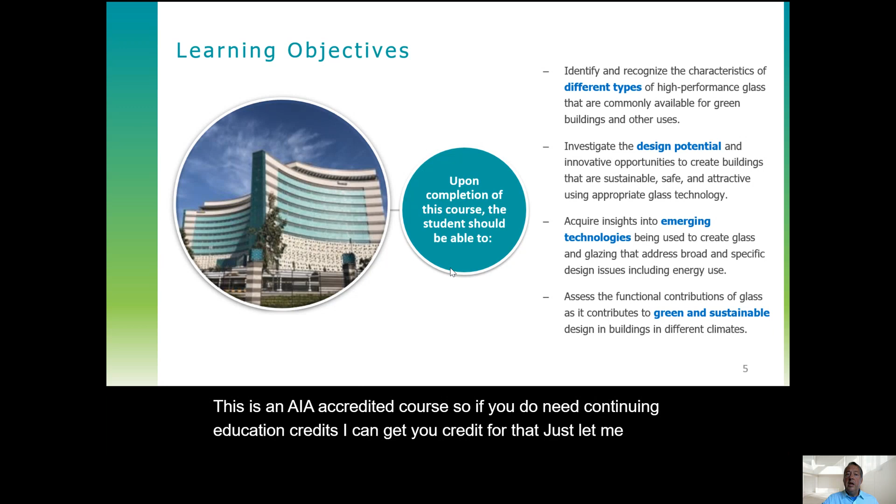What I'm going to talk about today is different types of glass—typically high performance glass products used in commercial and residential buildings. I'll also talk about some specialty applications within that space, a little bit about design potential and how these ideas can impact your design, and emerging technologies. These are sometimes new products, sometimes things that are coming, and sometimes products that are already available but people just don't have much awareness on how to use them. And then lastly, I'll talk about green and sustainable policies.

This is a course that I typically give to architects. A lot of times I do it at different trade shows and conferences, but I also do it in internal meetings, and with students. I do a wide variety, so I try to cover a pretty broad base.

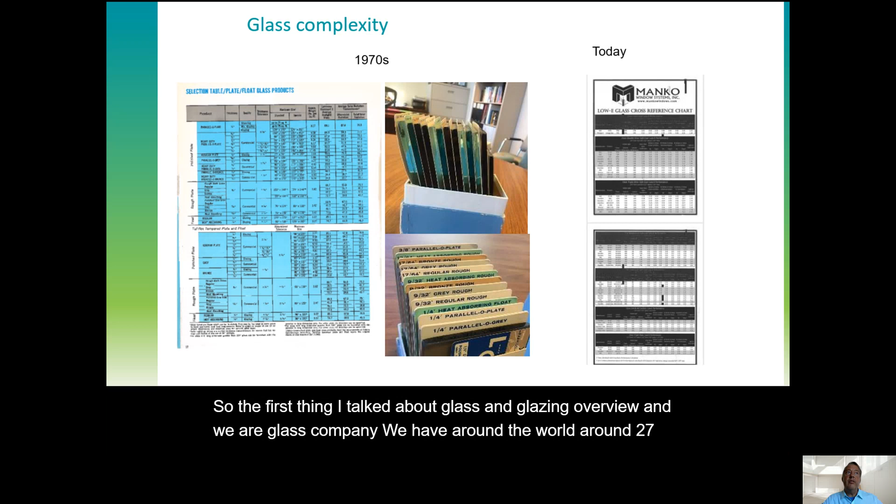The first thing I'll talk about is glass and glazing overview. We are a glass company—around the world we have around 27,000 employees. We make flat glass through the float process in about 30 some countries. We really make large sheets of glass, and we've been in this space for almost 200 years.

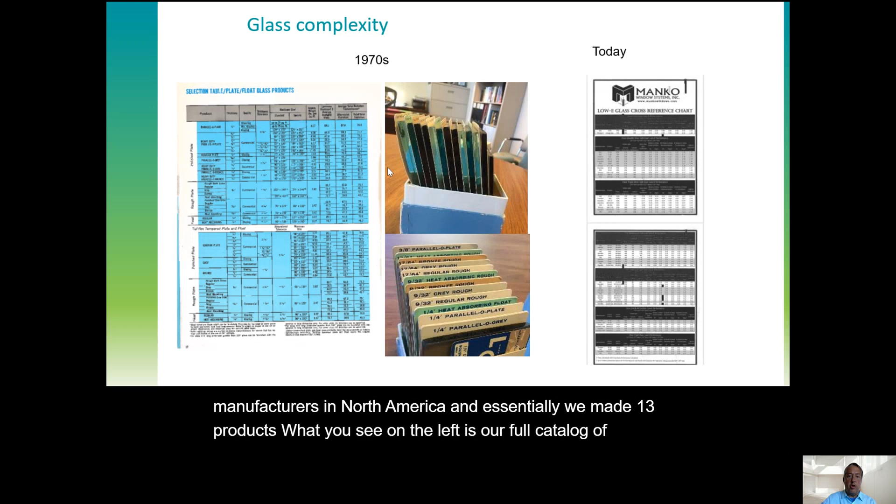Really, the last 50 years, glass and windows have become exceedingly complicated. Back in the 1970s, what you see here on the left is our company in North America, called Libbey-Owens-Ford. At that time we were one of two manufacturers in North America, and essentially we made 13 products. What you see on the left is our full catalog of all the products we made and all the performance. In the middle is our sample kit—this is what we'd send to customers. We had 4 colors, maybe 3 or 4 different thicknesses, about 13 products, and you'd cut that into a rectangle, stick it in a frame, and that was how you made windows for commercial and residential buildings.

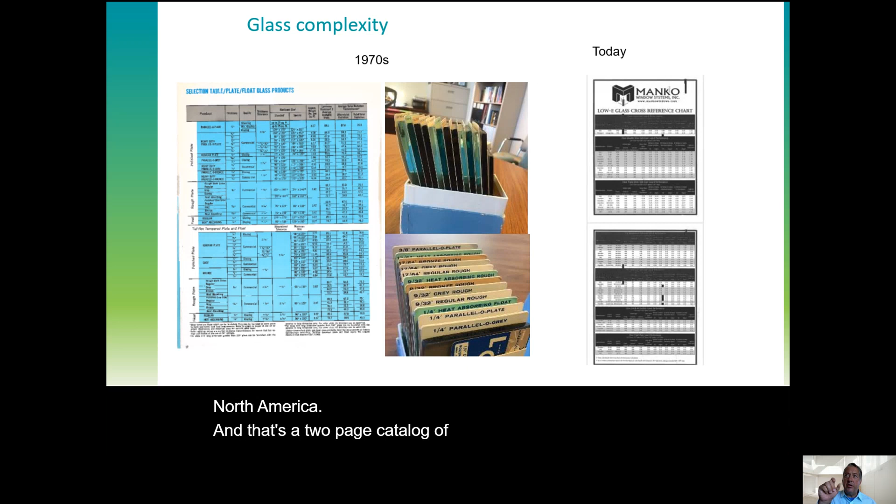Compare that to today—people make what's called IGUs, or insulated glazing units. Typically that's 2 pieces of glass with at least some type of low E coating on the inside surface, and it could be a couple different ones. This is one of our customers in North America, and that's a 2-page catalog of just the alternatives they offer in terms of double glazed units. Now there's maybe 24 different manufacturers of low E coatings and different levels of low E coatings. There's sputtered and hard coat, and some that are fourth surface low E's, and this doesn't even add in the complexity of added function—this is just performance ones. So windows and glass have become very, very complicated.

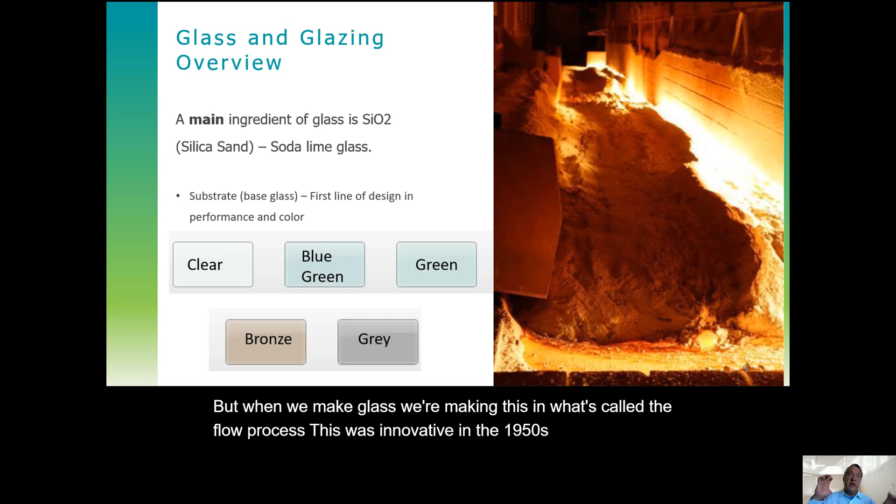When we make glass, we're making it in what's called the float process, innovated in the 1950s. Essentially what we do is in a very, very large furnace—like about a 7,000 square foot ranch house, single story—that is filled 4 feet deep with molten glass. That's the scale we have in our float lines, very, very large industrial manufacturing. We take sand, soda ash, dolomite, dump them in together, and melt that in this major furnace.

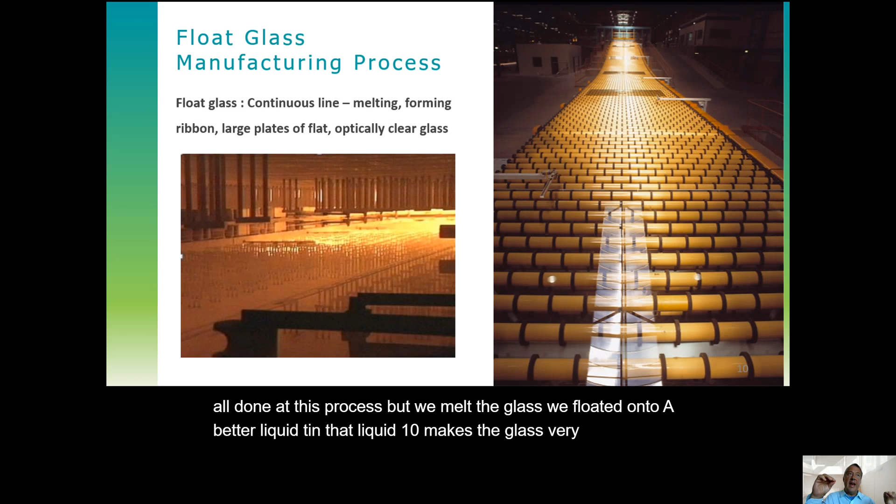If we want to change the color of the glass, we do it at this point with the raw materials—from clear, to low iron, to green, to blue, that sort of thing. It's all done at this process. We melt the glass, float it onto a bed of liquid tin. That liquid tin makes the glass very, very optically clear and very flat. You cool it from about 2,000 degrees down to about 1,000 degrees, put it on a roller bed, cool it down to room temperature, cut it up into big rectangles, and then use that to laminate, temper, that sort of thing. So we do a variety of things there.

When I talk to architects, typically what I'm talking about in terms of performance boils down to about 3 main things. So when we talk to people, we're talking about, when I look at this window, how does it perform?

What's the daylight? How much of the visible light transmission do I get? Between 0 and 1, 1 is 100% of the daylight gets into the room, 0 is blackout blinds.

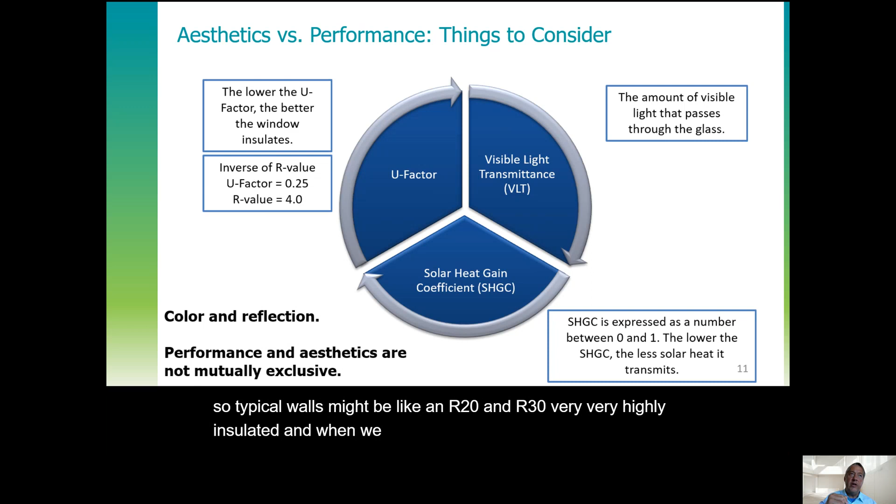U factor is how good of an insulator the window is. Typical walls might be R20 or R30, very highly insulated. U factor is the inverse of R value in North America, so a typical window is a U.25. In the UK, that would be like 1.4 watts per meter squared, something like that.

And SHGC is how much that window or glass reduces the solar load that comes through the window. 1 being 100% of the sun's energy comes into the building, and 0 means it blocks out all the heat that comes in. But those are the things that we typically talk about.

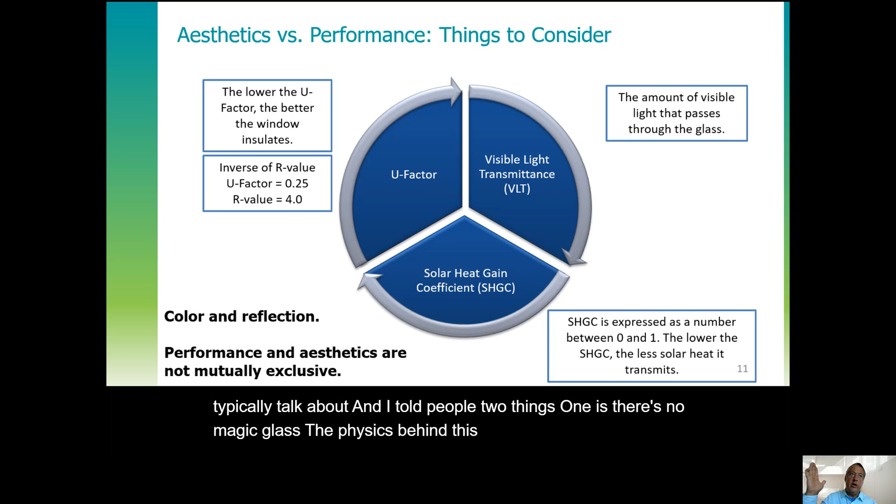I tell people two things. One is there's no magic glass. The physics behind this says you can't have a window that's 100% visible daylight and doesn't let any of the heat in. It just doesn't work that way. So there's no free lunch - there's definitely trade-offs in terms of all these different things.

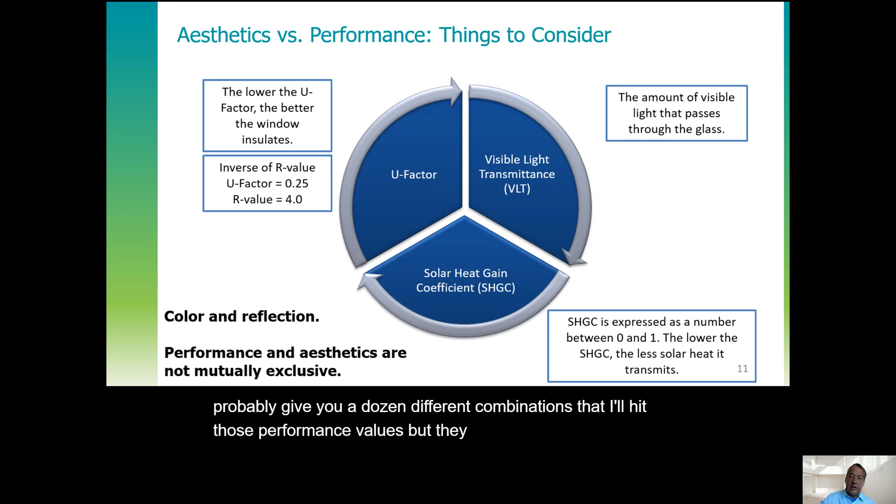But with that said, you can take a snapshot in time - a 0.3 SHGC, a 0.3 U factor, and 70% daylight - and I can probably give you a dozen different combinations that'll hit those performance values, but they will look dramatically different. So it's not just how does it perform, you also need to know what you're trying to accomplish in terms of the aesthetics.

If I do that, about 40% of the energy comes in with visible daylight, so you're going to get about a 0.4 SHGC if you have a very high daylight product. If you want something lower than 0.4 SHGC, you have to take out a little bit of the sunlight - that's just the nature behind it. Some coatings do a better job of this than others, but that's mostly what we're trying to do with coatings and glass.

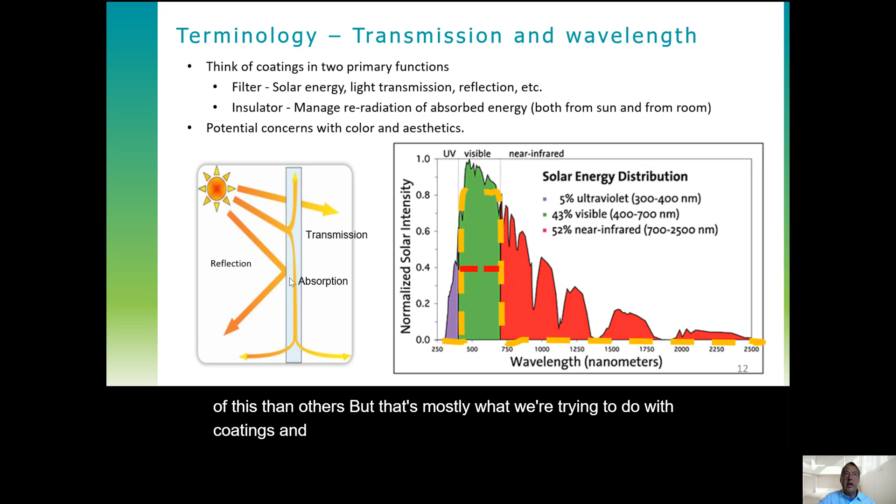The other thing we're trying to do is make the windows into better insulators. That's done several different ways - you have an air pocket or argon pocket, some sort of gas in between, and different coatings that perform better than others. Essentially, the sun's energy and room heat travel in waves, and what we're trying to do is manipulate that energy so heat transfer either gets transmitted through, absorbed into the glass, or reflected off.

We're trying to manipulate that to make the window a better insulator. So we might reduce our transmission a little bit by bumping up our absorption, or bump up our reflection - but you're trying to reduce heat transmission through your window and make it a better insulator.

Window design has loads of complexity that you can do to make windows better performing - you can put shades in front, plant a tree in front of the building, have thermal broken edges. There's all these different things in terms of window design. But in terms of the glass, the center of glass performance, there's really only a couple things we can do to make the windows better performing.

If we use a darker, more absorbing glass, less heat gets transferred through. If we use a better gas in that cavity - going from air to argon or krypton - the larger the molecule, the less there is to do convection and conduction, so it just performs better if you have a better gas or no gas at all. A vacuum is a really good insulator. You can also have a better performing low E coating.

When you talk about this, a lot of times you go from a hard coat to a single sputter silver to a double silver, or you can use more than one coating. You can put a coating on surface 2 and surface 4 in a window unit, or use more than 2 pieces of glass. You can go from a single glaze to a double glaze to a triple to a quad. But in terms of center glass, that's really it - that's all the triggers we have to try to drive better energy performance for windows.

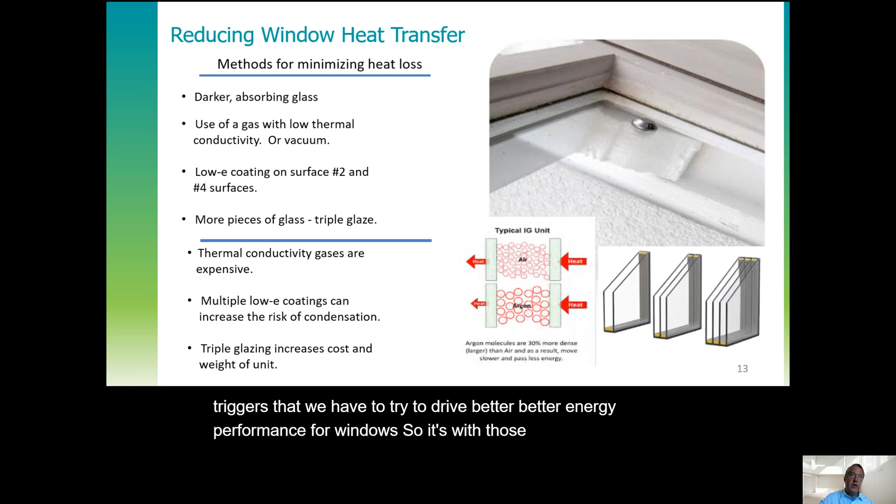So with those constraints, the budgets, and the performance and aesthetic targets, we try to help people accomplish their goals. What we see a lot of times in new architectural design is it's not just simple, 'we want a green looking building that performs like this.' We're trying to add different functionality. There's all sorts of different codes, sometimes opposing codes where the glass wants to do different things. So there are a number of things architects and designers have to consider when looking at building design today, and sometimes that makes the glass and windows really complicated.

One of the things we see is fire rated glass. This is becoming more and more common. The code typically says this window or this wall has to resist a fire for 15 minutes, 20 minutes, 90 minutes - that sort of thing. Typically there are 2 different ways that we do this with glass components.

One is what's called fire rated glass - think of this like your glass cooktop or Pyrex cookware. It's literally a ceramic glass that can withstand temperature for quite a while before it fails. It's a nice product, but it doesn't always last for some of the higher targets required for fire glazing. Sometimes you have requirements that say if that glass gets hit with a fire hose, it has to withstand the fire hose blasting at it for 15 minutes as well. Well, ceramic glass is going to shatter if that happens.

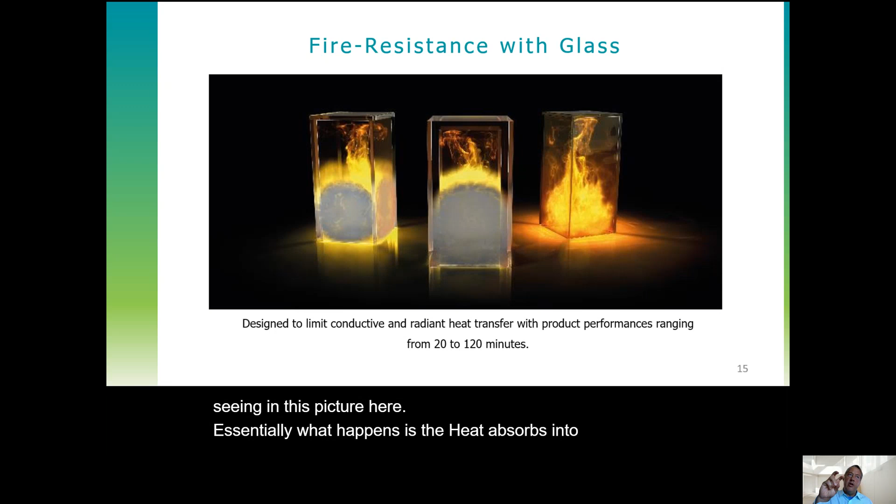So the other way we do this a lot of times is typically 2 pieces of glass with some sort of gel or goo in between them, which is what you're seeing in this picture here. Essentially what happens is the heat absorbs into that gel in the center, and it phase transforms from a liquid to a crystal. That crystal transformation absorbs the energy and withstands it, allowing a longer amount of time before that unit will fail.

So we see a lot of times fire resistant glazing is an important component. Really, I'm not an expert on this subject - we can point you to 3 or 4 people who can do a dozen different hour-long seminars on fire resistant glazing. We're just trying to give a very high level review of the different products customers might expect, or things architects might consider.

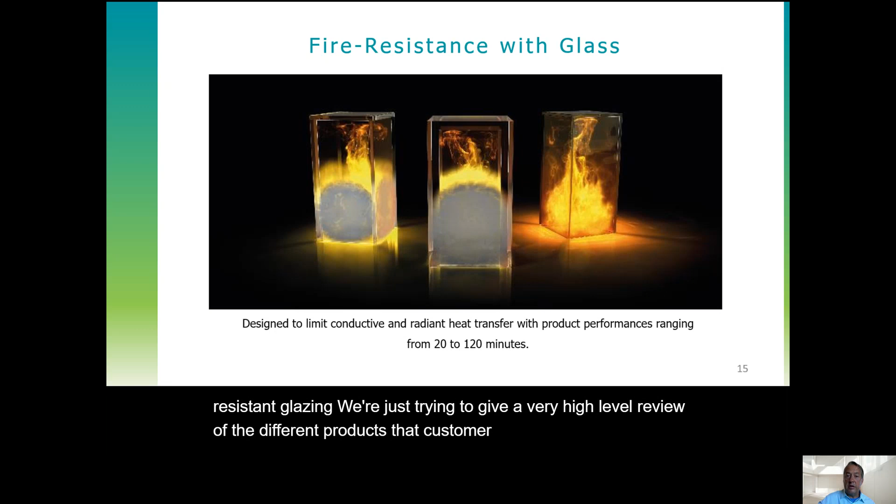The other thing we see a lot of questions on, and this is becoming more important city by city with local ordinances now, at least in the US, is acoustic control. Like in New York City, the 5 boroughs all have different acoustic ordinances they have to have for apartment buildings, and there's all this complexity that goes into it. But acoustic control, simply put, typically has the same sort of solutions.

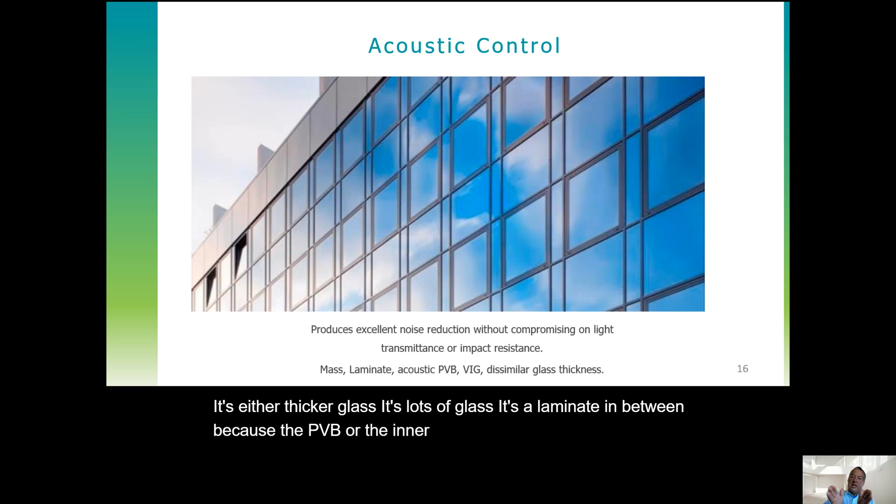Sound travels in waves, and you typically need mass to absorb that wave - that's what most of these acoustic solutions have. So it's either thicker glass, lots of glass, or a laminate in between, because the PVB or interlayer material between the glass - that plastic material - absorbs that acoustic slightly differently than the glass does. So there's acoustic PVB, really, really thick glass.

VIG, or vacuum insulated glazing, is a really nice solution for acoustics because sound doesn't travel through a vacuum as well as heat doesn't travel through a vacuum. So that does a nice job knocking out your acoustics in a really thin form factor. Or if you take dissimilar glass thicknesses, a 6 millimeter over 6 millimeter in an IGU will not perform as well as a 4 millimeter over 8 millimeter in an IGU. That's just because those 2 different thicknesses attenuate the sound slightly differently, so it gives you some benefits.

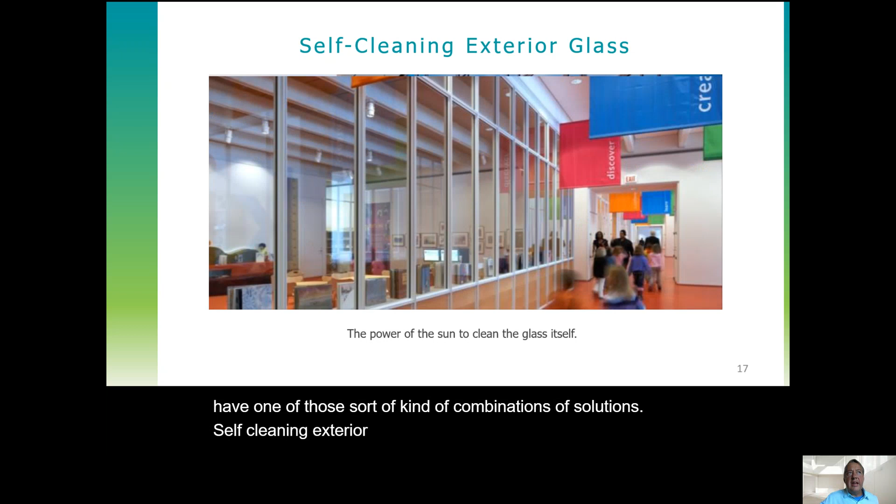But generally, acoustic solutions have one of those sort of combinations - self-cleaning exterior glass. Again, it's not fully self-cleaning, but it 100% minimizes the maintenance required on the outside of the building. This is a really nice solution, and it's been around for about 20 years, but it hasn't really fully taken off.

One of the reasons why is if you put a self-cleaning glass on your number 1 surface, a lot of times that means you have to move your low E, which is typically on surface 2, to surface 3. So that drop off in performance, sometimes you can handle that and sometimes you can't.

But we're now seeing double-sided products that have self-cleaning glass on surface 1 and a low E on surface 2. I think this is going to really start to take off, because what self-cleaning glass does—I'll explain the technology a little bit—is it's typically a UV charged coating that's on the first surface, on the outside of the building.

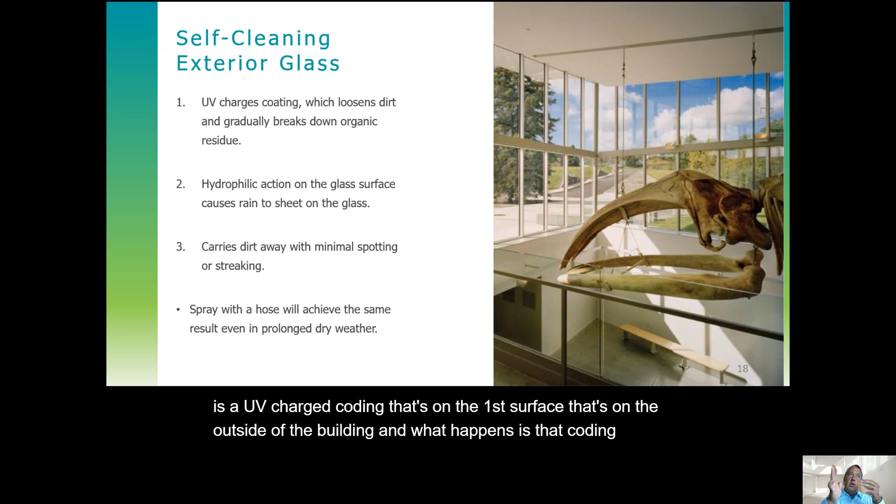What happens is that coating gets charged, and then when any sort of bird fouling or organic material or dirt gets on that surface, the coating actually starts to break down that material. And then when you get rain, or any sort of water—rain, a hose—it actually sheets the water off in a hydrophilic action. It helps take that bird fouling or any organic material off. Once it's broken down, it's eliminated.

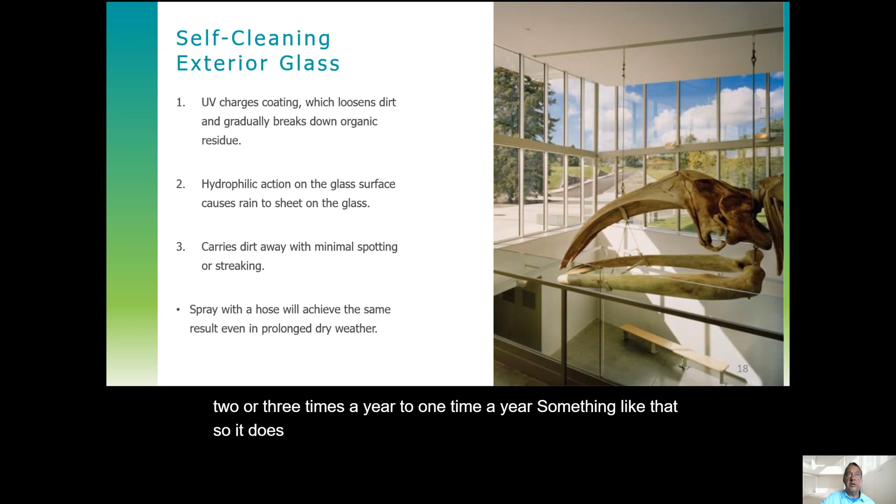So the reasons this is nice and why architects like it is it minimizes the amount of cleaning, and it improves the aesthetics of what that building looks like month over month, year after year. Maybe you reduce your building cleaning time from 2 or 3 times a year to 1 time a year, something like that. So it does have really nice benefits in terms of health of occupants—you don't have to send people up—and it reduces costs for a lot of building owners as well.

Anti-reflective coatings—this is something else that we often see in design. What we see with anti-reflective coatings is a single piece of clear glass has about 8% reflection, so each surface gets 4% reflection off of it. So when you take and put that into an IGU, you've got 4, 4, 4, 4—16% reflectivity off of a regular window in a commercial building.

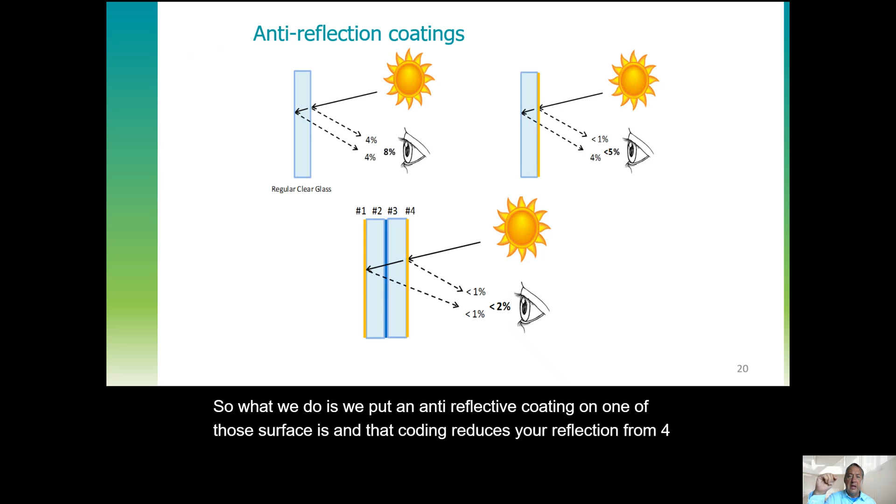So what we do is we put an anti-reflective coating on one of those surfaces, and that coating reduces your reflection from 4% down to about 0.7%. So if you laminate that together, you go from about an 8% reflection down to less than 2%. It dramatically reduces the reflection, and it gets rid of the signal to noise of what you're seeing through the glass versus what you're seeing reflected off the glass.

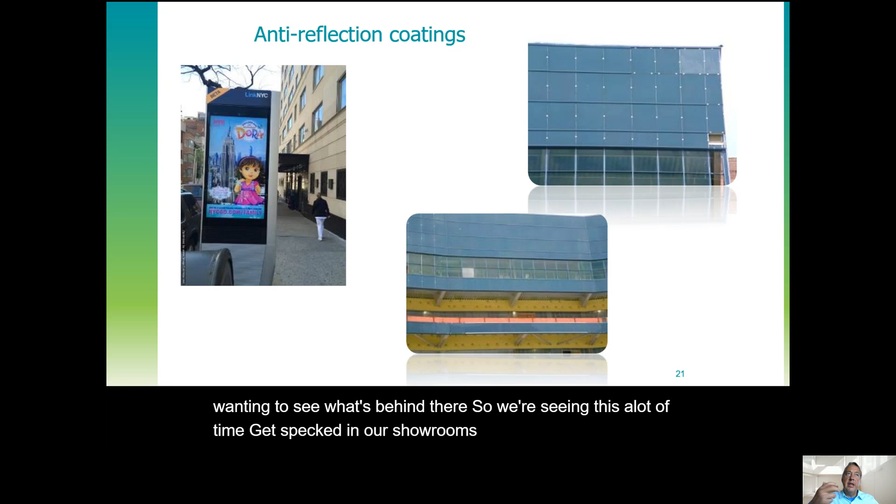These are 2 examples of where this really manifests and shows benefits. One is in signage or display—this could be digital signage or print ads, and it could also just be storefronts where people want to see what's behind there. So we're seeing this a lot of time get spec'd in car showrooms and museums and places like that, where there's signage we really want people to read and see.

The other is in the vision areas. This is a great example of a stadium in North America—this is the vision area, these are all the press boxes. What happened with this one box in the middle that looks like it's this creamy white color—that's actually kind of what normal reflectivity on glass looks like.

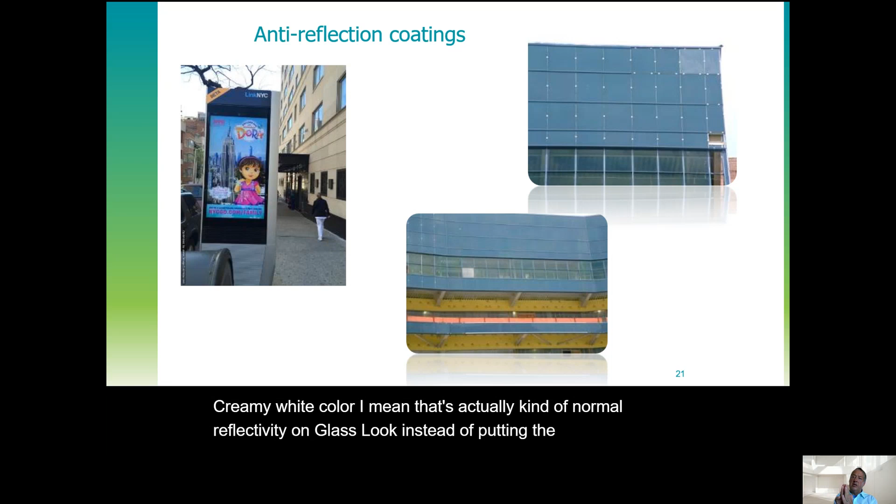Instead of putting the coatings on the outside surfaces, the fabricator just flipped them around and inadvertently put it against the middle. So all these areas around it have anti-reflective on both surfaces. You can see inside the overhead lights, you can see chairs—you can really see through the glass and into the glass. And where this really benefits is the people that are in the press box.

When you're watching a game, you don't see that reflection of your high-vis shirt or the white lights behind you. You can actually see the sporting event. So there's really lots of nice benefits in your vision areas.

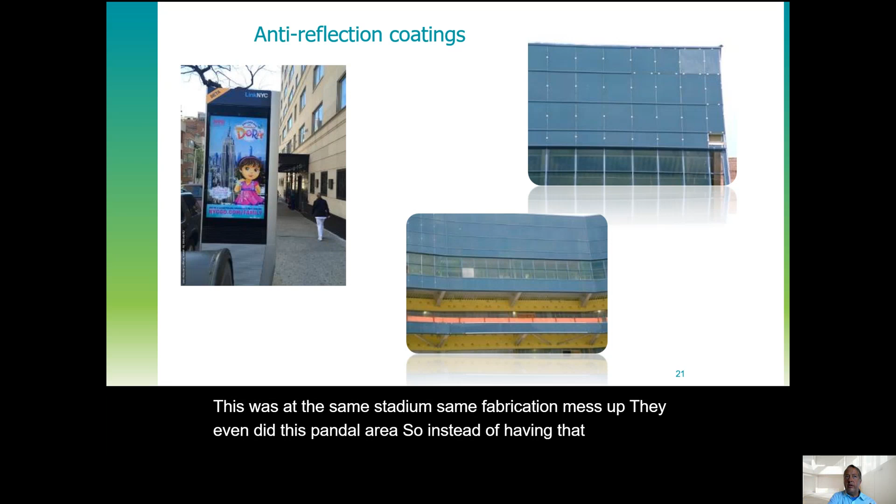This was at the same stadium, same fabrication mess up—they even did it in the spandrel area. So instead of having that reflection of the glass onto the field where it might blind the players, they actually put it and flipped it around so you wouldn't get that glare down. These are ones that, again, they just flipped around and you see the same reflectivity on it. But these are really nice ways that you can actually use anti-reflective coatings in your design to dramatically improve the look and aesthetics.

Bird-friendly glazing—this is another kind of emerging topic. It's been around in discussion for maybe 5 years.

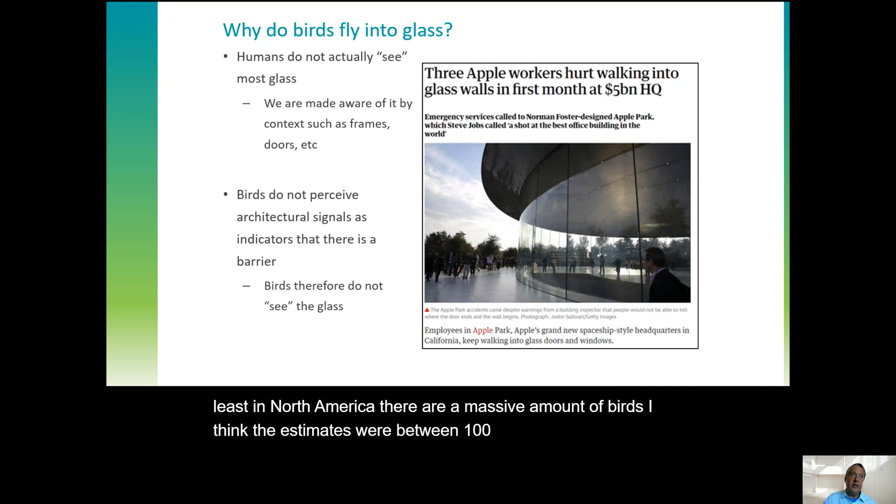It's not ubiquitous yet. It's not everywhere. But what people are seeing, at least in North America, is a massive amount of birds. I think the estimate is between 100 million and 1 billion birds per year die flying into buildings.

And people say, well, birds just don't see the glass, and people do. That's not true. People actually don't see glass either. What people see is context. You and I notice the framing on the door. We notice the butt joint. We notice the seams. We notice the handle. So therefore, we don't walk into the glass.

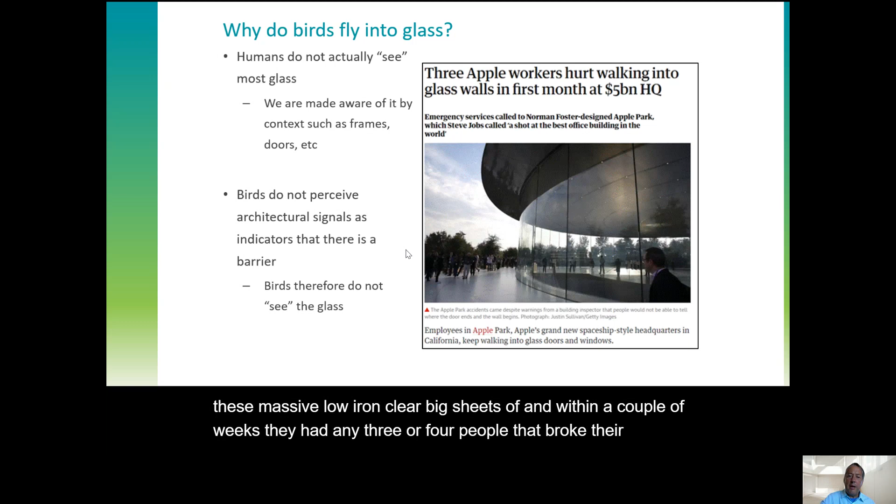But if you go to larger and larger pieces of glass and lower iron, where it's higher light transmission, what's becoming more common is people actually walking into these large sheets of glass. Apple built the spaceship in Cupertino, and they put in these massive low iron, clear, big sheets of glass. And within a couple of weeks, they had, I think, 3 or 4 people that broke their noses walking into the window. So they had to put stickers all along there so people would stop doing it. People don't see glass either.

They see context. And so what we're trying to do with birds is, you can't educate them on context. What you have to do is put that context into the glass. And what's generally accepted is 2 inches by 4 inches. Every 2 inches by 4 inches, you have to put in some sort of contrast that gives them that big difference between transmission and reflection that says, hey, there's something here.

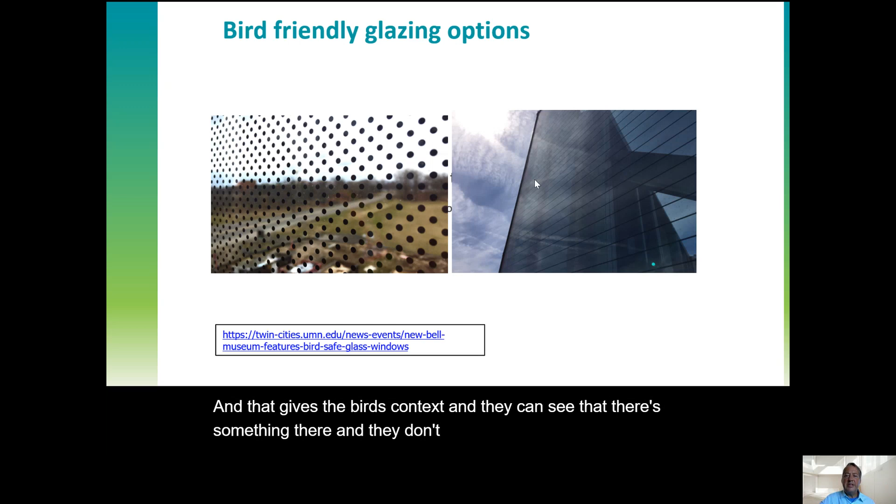And the majority, 99% of what's actually been done, is people just put frit, little ceramic dots, all over the glass. And that gives the birds context, and they can see that there's something there, and they don't fly into the glass. But aesthetically, that doesn't look great. You see all these little dots when you're looking through it. From the outside, maybe it's not obvious, but from the inside, you definitely notice this in your vision area.

So what people are developing is these products based on the bird's eye. The bird's eye has this big spike in the UV where the human eye does not. So ideally, if you could put all that contrast in the UV, you then make something that birds can really see and isn't noticeable to people. So that's what we're trying to develop. There's a number of people that are developing these enhanced coatings as well.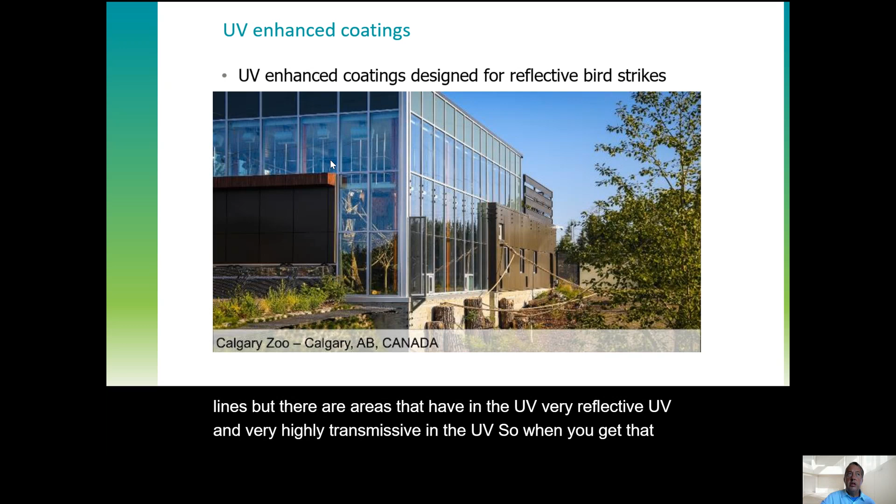In the US, this is still very, very regional. There's no ASTM standard on it. Even the world's experts really don't agree with how we are going to test and do this. What we're trying to do as an industry is say, here's the way you test this. And if you test against these standards, you'll come up with a number that's a threat level, and anything better than this threat level will pass.

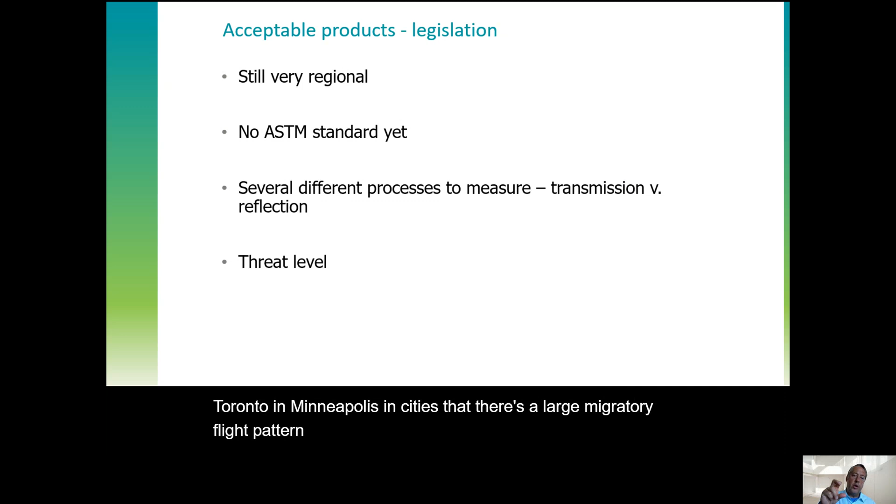That's what's trying to be done, but it's still kind of new and emerging, and it's really regional. So in cities like Toronto, in Minneapolis, in cities where there's a large migratory flight pattern and a bunch of big buildings, there's a load of regulation on these things. Other cities, you might not even hear about this.

So now I'm going to talk a little bit about emerging technologies. What I mean by this is it's not necessarily something that's brand new, but it is something that's starting to emerge as a bigger need and demand in the marketplace. The reasons that we're seeing this is in North America, there are some performance targets out there that basically exceed what we're capable of achieving with the given technology today.

So we make double glazing with one coating of low E. And if you look at the targets 5 years, 10 years from now, basically we can't hit those targets with the designs that we do today. We also see that buildings have very different demands today than they did 50 or 100 years ago. You used to build a factory. That factory was to make whatever, and that's all it was. And now a building might get built that is mixed use. On the first floor, it's this. On the second floor, it's something else.

On the third floor, it's something completely different. And even on the first floor, maybe it's like a WeWork building or something else like that, where it's this type of building in the morning. It's a yoga studio in the morning, and then it's office space in the afternoon, and the demands and the needs of those different users are very different.

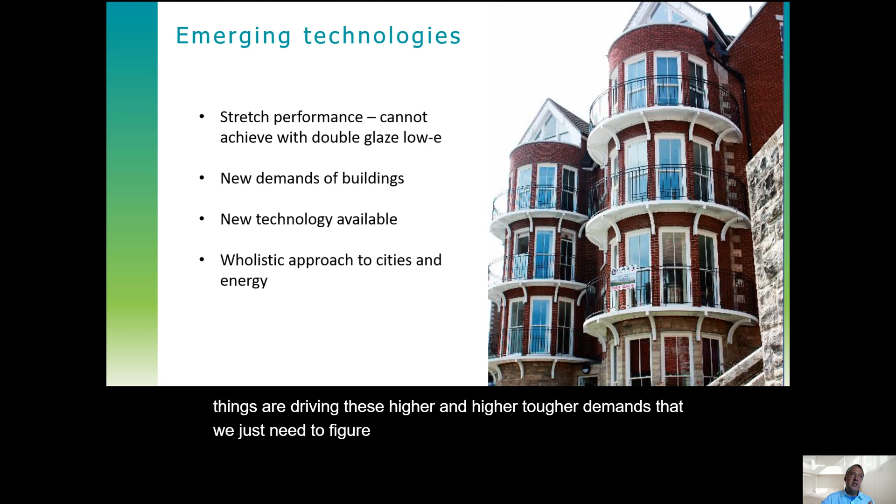There's also new technology available that wasn't available 50 years ago. And lastly, we're seeing cities have this holistic view to how they approach energy and building usage. And all of those things are driving these higher and higher, tougher demands that we just need to figure out: are there new technologies that maybe are a better fit to accomplish some of these new targets that we're trying to achieve? So the first thing on this is vacuum insulated glazing.

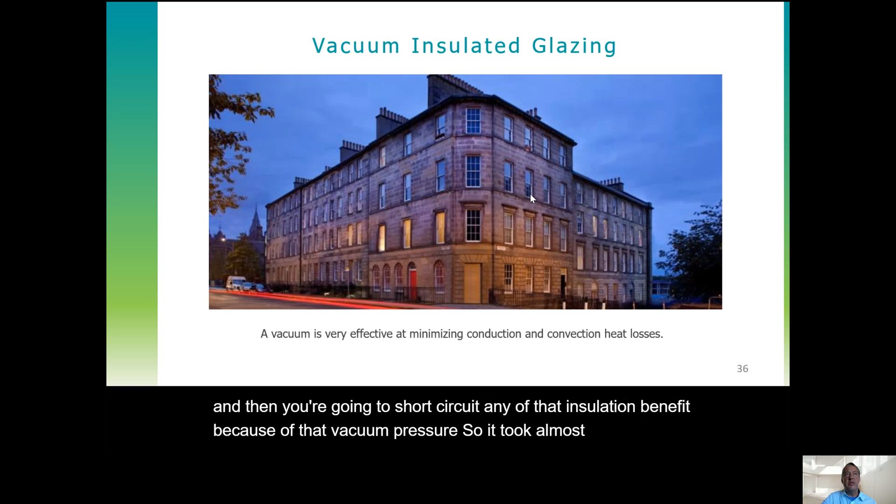And this, again, is not new technology. The first patents on this came out in 1913, where somebody just said, if I had an IGU and I just pulled a vacuum on it, a vacuum's a really good insulator, that'd be great. Well, the challenge is, if you do that, the panes will suck together, the glass will probably break, the edge seal is going to suck in, and then you're going to short circuit any of that insulation benefit because of that vacuum pressure. So it took almost 100 years. 1997 was the first commercial product that was available, and it's been around for 23 years now. But the science behind this is, it's two pieces of glass.

There's really three tricks to making a VIG product compared to an IGU. The first is what I mentioned, is that pressure. It's 0.1 pascals of pressure. That's about 1 ton per square foot. So the first thing you have to have is this microspacer array that keeps the panes from collapsing once they're put under pressure. So it's this little tiny metallic or some sort of hard compressive material. There's glass and ceramics and all sorts of different ones that are used. But you have to have something that's literally every inch, or inch and a half, across that entire face to keep the panes from collapsing under pressure.

The next thing is you have to have a seal around the edge that won't suck in. So most times this is a rigid seal, so it's like a low temperature molten glass frit, or it could be like a metal weld where you're literally welding the edge shut. And then the third trick to making that technology work is you've got to figure out how to get the air out. So most of this is done with, you drill a hole, you vacuum out the air, and then you seal that with one of those rigid materials.

There are some materials out there that don't have that pump out tube. They're done in a vacuum chamber. There's a few other ones, but generally speaking, what's commercially available has a spacer array, it's sealed most times with a low temperature molten glass frit, and then there's a pump out tube to get the air out. But those are the three tricks on how to make the VIG design.

But the reason this is really nice and interesting is it makes a really highly insulated product, better than the equivalent in an IGU, in a very thin form factor. So in 6 millimeters, a 1/4 inch thick, you can get down to about a 0.18 or an R5 insulator. And if you go up a little bit thicker, 10 millimeters or 3/8 of an inch thick, you can get up to an R8 product in a really, really thin profile. So that's really nice.

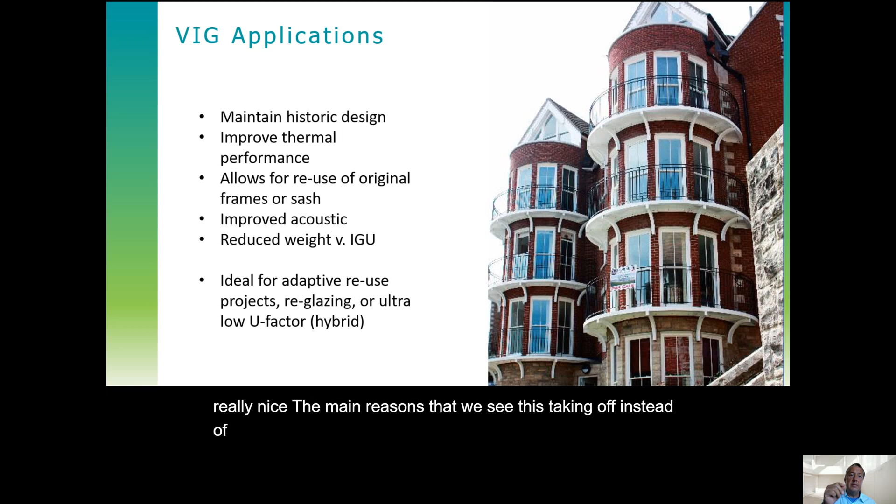The main reasons that we see this taking off instead of just replacing IGU technology is that thin profile really helps you maintain historic design. So a lot of times this is used in retrofitting existing buildings, adaptive reuse. If you have to reduce your energy bill and you want to keep your existing windows, or you want to keep the existing design from a heritage standpoint, VIG gets used for a lot of those sort of things.

There are times where we see VIG get implemented because of the acoustic benefits, or because of the weight. It's not that you can't handle the added thickness. You can't handle the added weight in an adaptive reuse of a standard, say, 1 or 1.5 inch IGU. So we see a lot of wide varieties where this sort of technology is starting to take off.

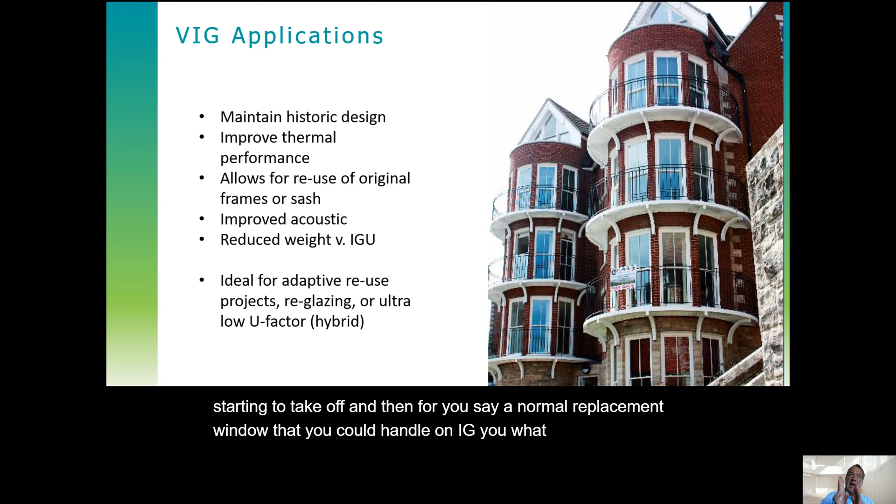And then for, say, a normal replacement window where you can handle an IGU, what we're seeing is people using that VIG pane as a hybrid VIG IGU. Now you have a triple glazed product in a double glazed form factor. That kind of opens up all sorts of different design criteria for you.

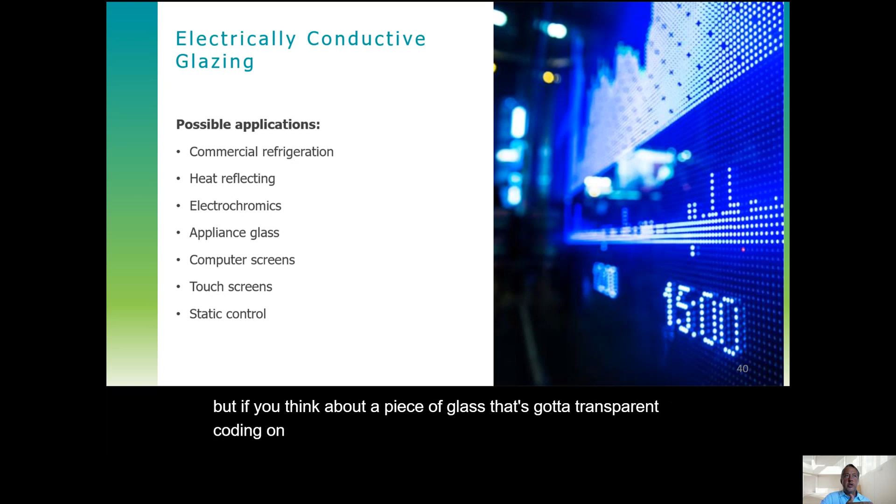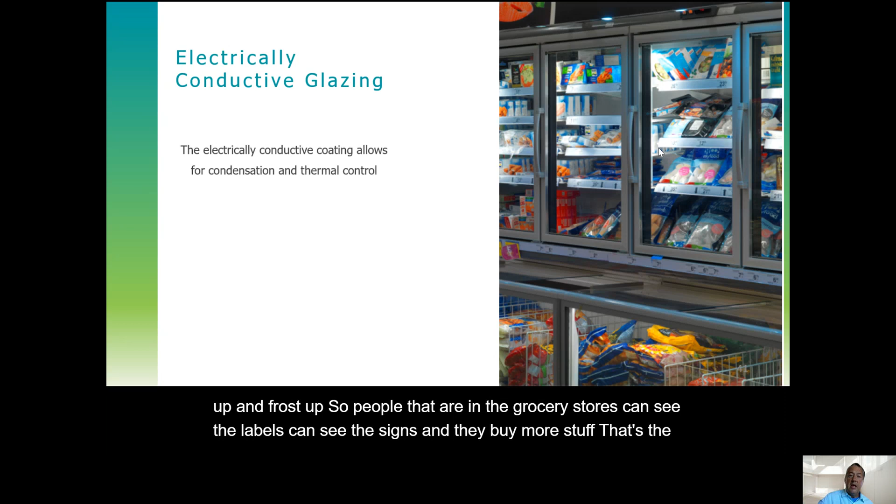So if you go in your grocery store, all we're doing is we're using that coating to heat up the glass 2 or 3 degrees, just so the windows don't fog up and frost up. So people that are in the grocery stores can see the labels, can see the signs, and they buy more stuff. That's the reason grocery stores do that. So that technology has been around for quite a while. But what we're starting to see people do is use this wire to drive new technologies and different technology.

So these two pictures are of the same building. This is one of our customers that's over in Asia. And what they do is in a piece of glass, they embed RGB LEDs. So colored LEDs every inch. And then you have a computer that runs those, and the power to those LEDs is etched into the coating. And you run these through a computer program, and essentially then the building becomes a display.

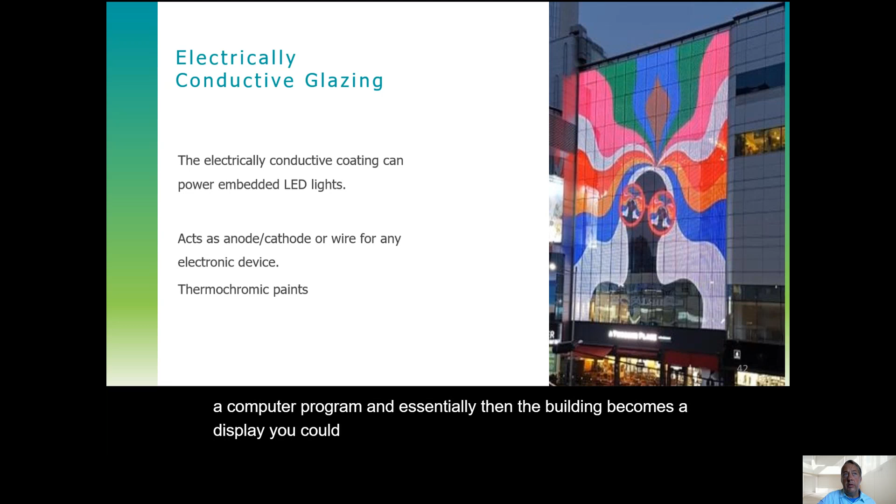You could show movies on the building. You can have your company logo on the building. So these sort of technologies are really interesting in what it can do, and this merging of the facade and the display all into one really seems to be taking off. So that's one kind of thing you can do. But these coatings, again, they're enabling things like thermochromic paints and electroluminescent paints, where you need a current to drive that glow or that color of the painting. It really drives a number of different technologies.

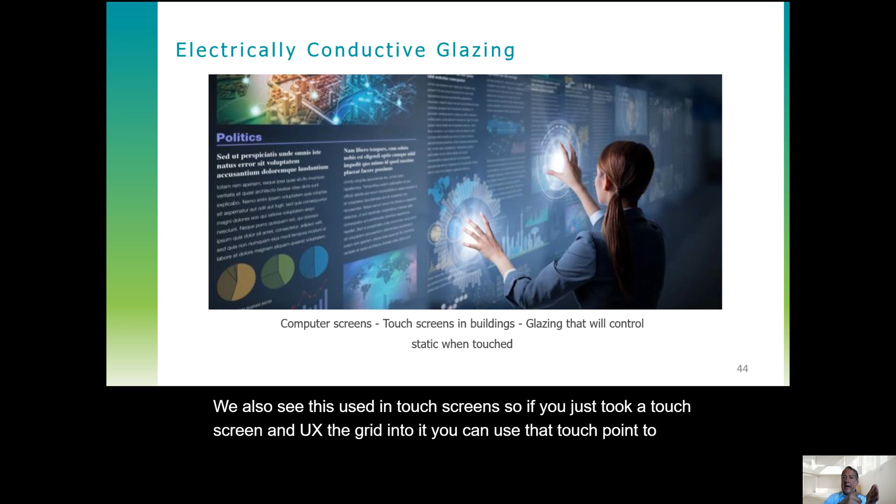We also see this used in touch screens. So if you just took a touch screen and you etched a grid into it, you can use that touch point to say, where is that XY, and use it for touch sensing. And then one of the latest things is switchable technology. So there's a couple different ones. There's thermochromic and electrochromic and a variety of different switchable technologies. And essentially what you're looking at on here is, if you see on the top and on the left, the glass is really high light transmission. And these panes in the middle here are kind of darker.

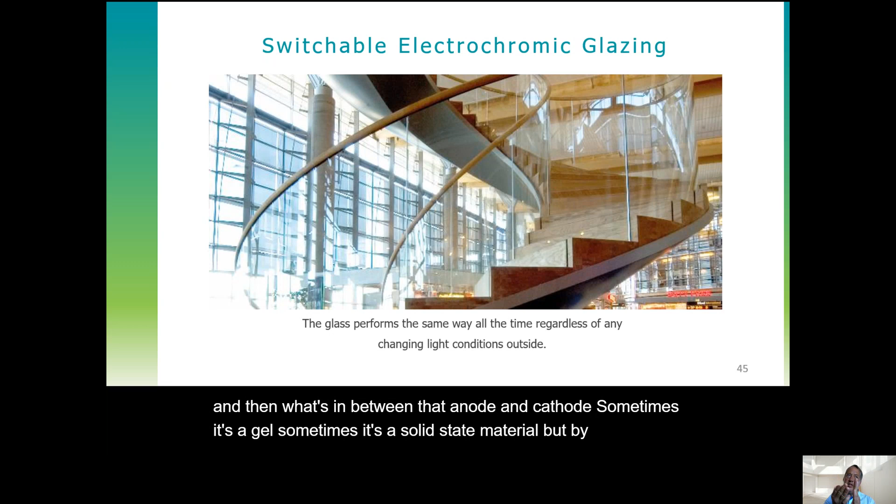So essentially what you do is electrochromic glass is two pieces of our glass. And think of it as the anode and the cathode of the battery. And then what's in between that anode and cathode, sometimes it's a gel, sometimes it's a solid state material, but by applying a current, you actually change the orientation of those cells in between, and you can darken up the glass, or you can lighten it up, or you can make it go opaque. You can do a variety of things. And this does improve building performance. It darkens the glass, the sun's energy comes in less, so you reduce your AC bill.

But the real benefit in electrochromic glazing has nothing to do with that. If you have windows that don't have all this glare, that don't have all this heat, you can actually sell that space better. And one place that this is really evident is in places like airports. We have a couple customers where, in some airports you go in, gate 6, it's unbearable to sit anywhere near the window in the afternoon because it's just too hot. So by putting in this switchable glass, you can actually tint it down and darken it to the point where it's comfortable to sit there.

You can work on your laptop, you can see the screen. And what they're noticing is it opens up floor space of usable area within your building. It makes your comfort level and occupant level much, much better. And then they see other things like, well, the food court that's right next to that gate now gets more business. So now you can charge more for the rents in the food court.

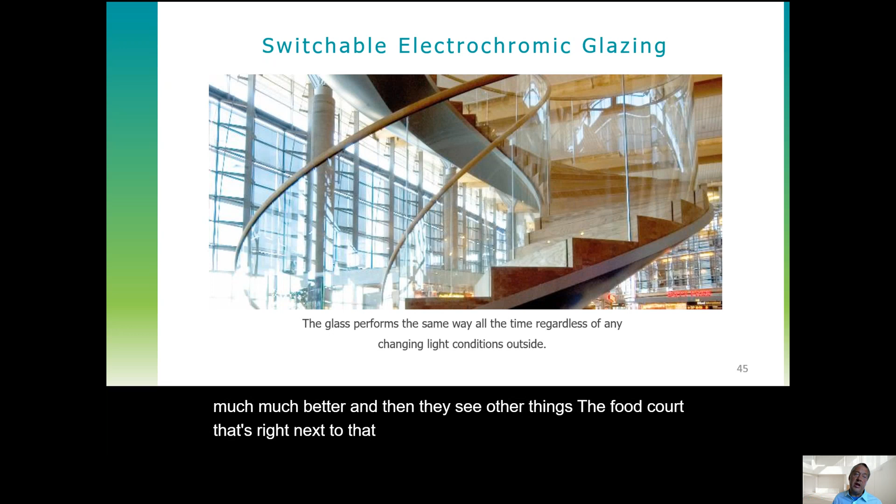There are trickle down effects that are the main drivers for these technologies, so we see this really starting to take off with a lot of interesting growth in this area. But it's managing light, heat, and performance levels, and sometimes it gets complicated because instead of a passive product you have an active product. If you want to really make it work, you have to tie it in with sensors and building controls, so that adds complexity, and that's what the industry is trying to figure out now, how do we make all these things work.

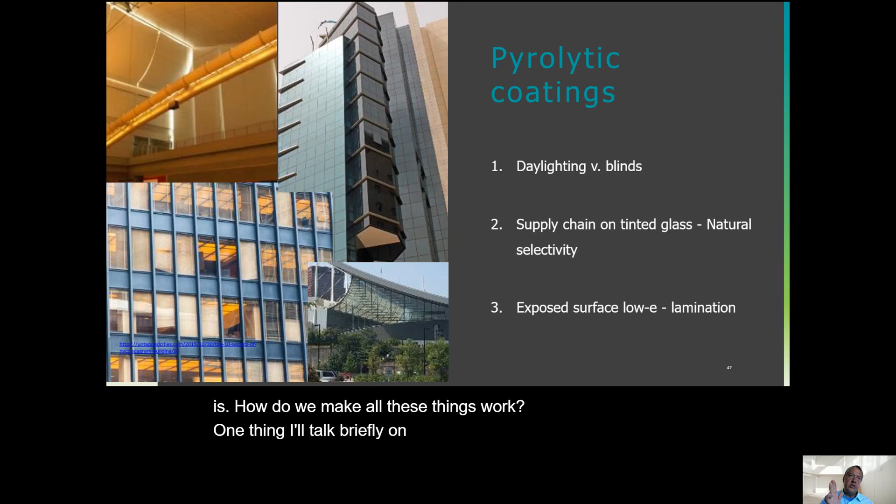One thing I'll talk briefly on is pyrolytic coatings. These are hard coats versus what's called a soft coat or a sputter coat. You see both of these used in new construction, but there may be times hard coat really makes more sense, and the value proposition is just better with those hard coats.

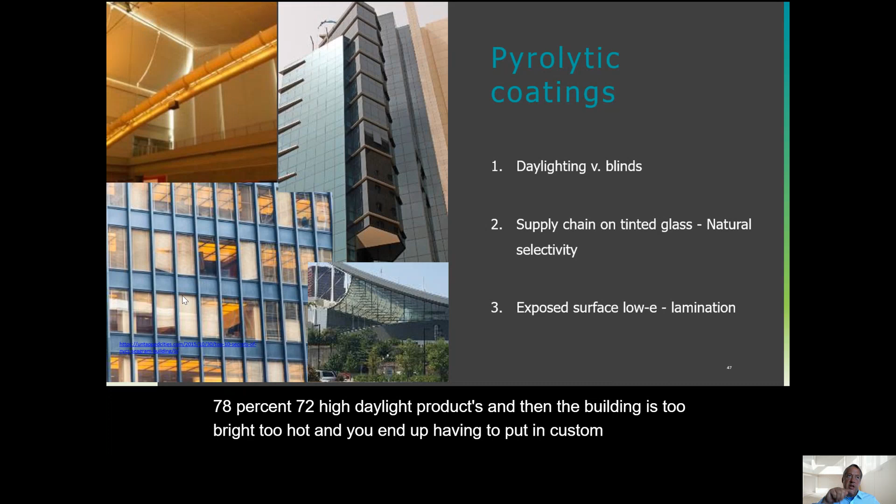One area we see this in is blinds versus daylighting. Sometimes people design a building with really massive, 70, 78, 72% high daylight products, and then the building is too bright, too hot, and you end up having to put in custom blinds, or you get this sawtooth effect, where people close the blind in one room and the one next to it doesn't look right. So you get all these varying looks on the building as a result of your blinds, and you don't really get the benefits of daylighting a lot of times when people are closing your blinds.

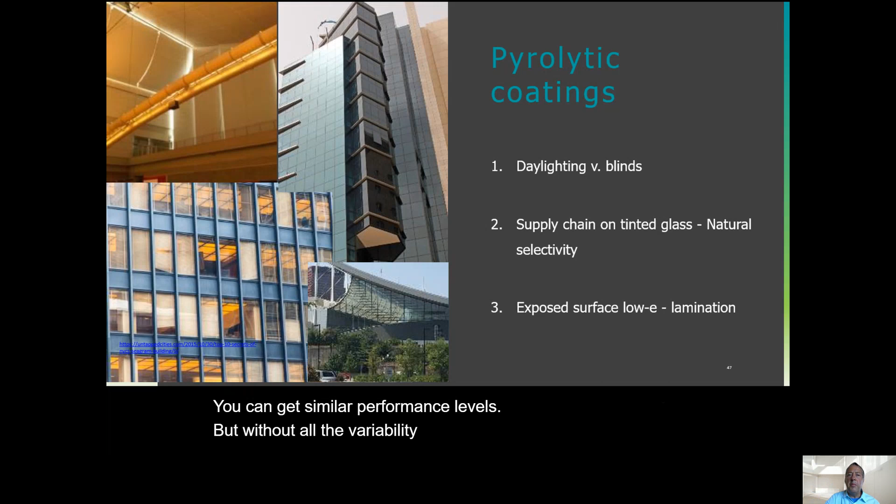So if you design a building with a pyrolytic coating that's a little bit darker, you can get similar performance levels, but without all the variability in aesthetics and performance that sometimes these blinds and high daylight products get. Another driver for why people will often spec pyrolytic glass is the supply chain.

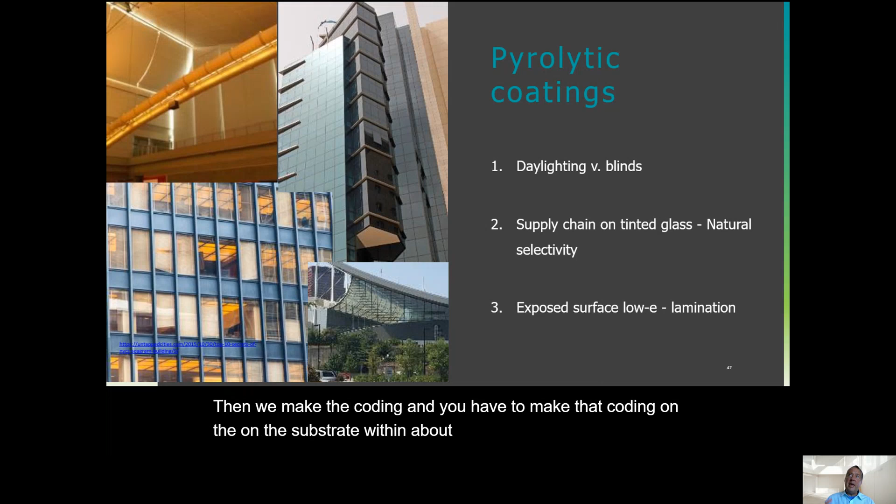When we make hard coats or pyrolytic coatings, you can make a bronze glass or a green glass, put this coating on, put it in the warehouse for 5 years, and it has no shelf life issue. Sputter coats are these high performance soft coats, and when you want to make that on a dark glass, we might only make bronze once a year. So you have to wait until we're on bronze, then we make the coating, and you have to make that coating on the substrate within about 30 days, and then make that into a finished IGU within about 30 days. So if you're designing a high performance building with a tinted substrate, your window to make that building and get the glass might be once a year, which really limits the other parts of the project that you maybe didn't consider.

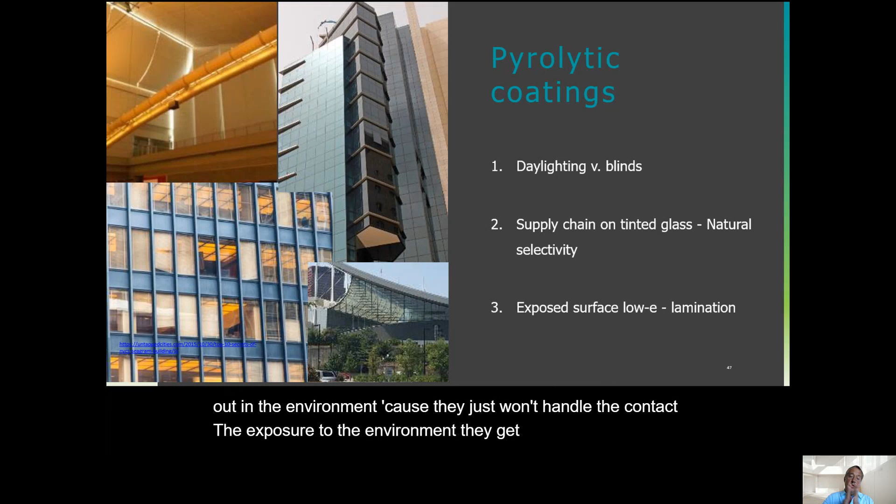The other area we see this used a lot is in lamination. Often these high performance low E's get laminated and put against the PVB, because they can't be on an exposed surface out in the environment, they just won't handle the exposure to the environment, they get oxidized. So that's a really nice SHGC performance, but you don't get any U factor benefit, you don't get any insulation benefit when you embed it against a PVB.

So if you're going to have a lamination in your design, and this happens in areas like Florida where we have hurricane codes, if you design in and have your low E on an exposed surface, you get the SHGC benefit and the U factor insulation benefit. So there are times you may really want to consider what you want to spec into the building.

Another thing I'll talk about, this is still new, is building integrated photovoltaic. Instead of the windows rejecting the heat, reflecting it, absorbing it, or transmitting it, you're actually converting that from heat into electricity, making PV cells into your transparent windows. This is interesting because of ZNE or ZNC, zero net energy or zero net carbon. When you try to get your operating bill down to zero, you need to offset the amount of electricity by generating electricity.

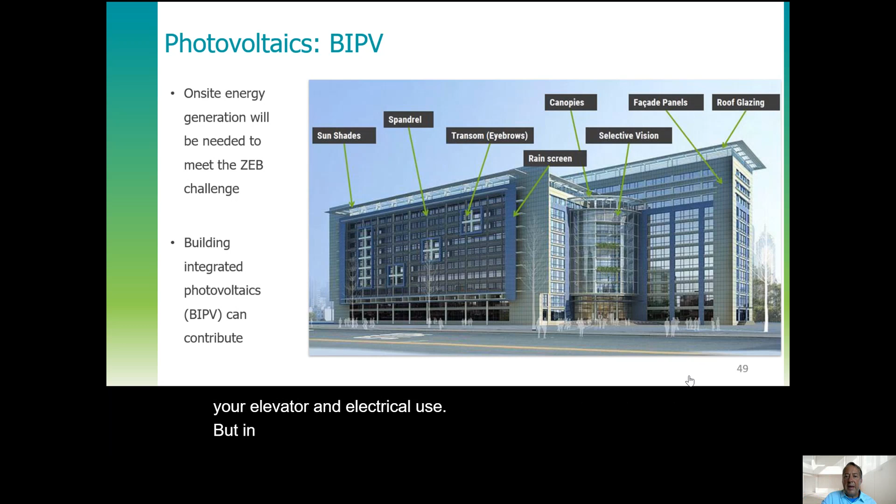In most small buildings, you can put PV cells on the roof or in the parking lot and generate enough electricity to offset your AC and elevator electrical use. But in really tall buildings, you run out of space. You just aren't generating enough electricity. So you start putting it in your spandrel, your transom, your canopies, and other areas, and you run out of non-vision area places to generate power.

So you get to the point on these really tall buildings where the only way to get to zero net energy is you have to start generating electricity in the vision areas of the windows. And there's a lot of window area to do this, so we're starting to see this as a neat technology that's taken off.

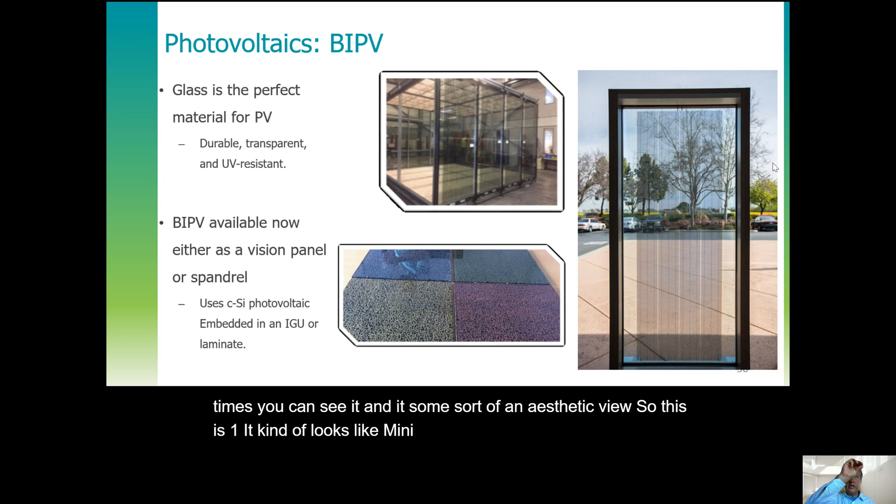There's a couple different products on the market today. A lot of them are either a combination of crystalline silicon or different types of materials, but essentially you embed that into a laminate in the vision area, and most times you can see it, and it has some sort of aesthetic view. This one kind of looks like mini blinds — it's literally crystalline silicon strips that are cut in and laminated. Aesthetically, it's not a horrible looking product, and it performs pretty well.

But what people are trying to do is get this to where it's not a vision-impacted product, and it's fully transparent. There's a half a dozen different companies around the world trying to make these products today, and this is the sort of thing you're actually looking at.

These aren't going to perform as efficiently as a regular PV cell or crystalline silicon solar cell — they might perform, say, half as well. But you have such a large area, and it's heat that you'd be rejecting anyway, and now you're starting to actually generate that into electricity. So to me, these sort of technologies are really exciting in how they impact the way you start thinking about buildings and operations in the future.

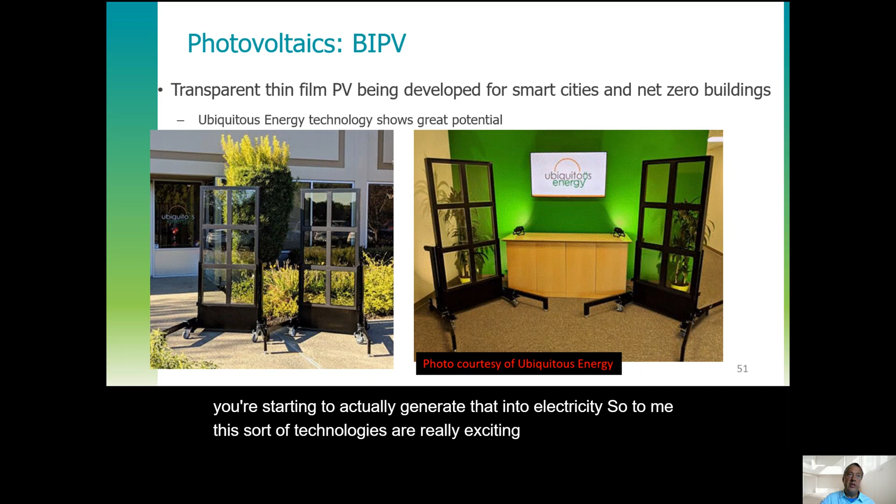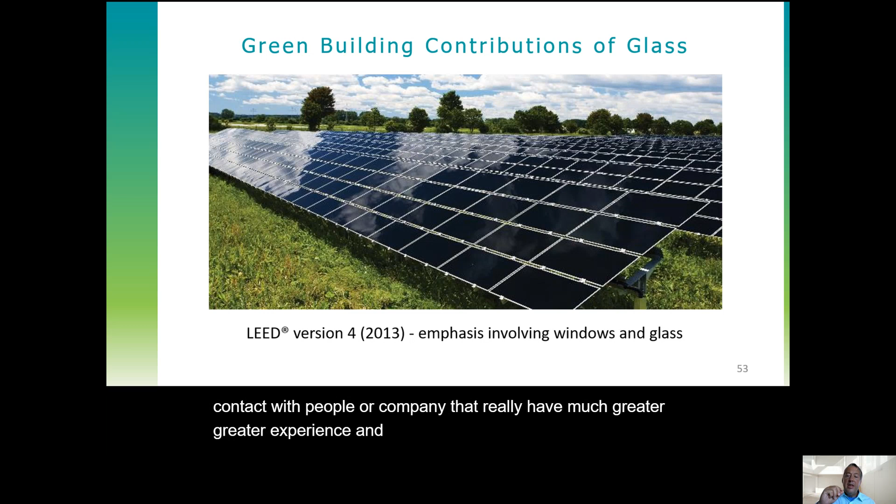I'll talk very briefly on green building. This is most times what's considered LEED, or ways that you get credits in your building design. What we're looking at here is there's a new code that came out in 2013. I'm not an expert in any one of these subjects, LEED especially, but I can at least say in generality here's the things that are going to get you LEED credits, and I can get you in contact with people in our company with much greater experience than I do.

There's a couple things that involve windows and glass when you look at LEED credits. One is reducing your fossil fuel, increasing your renewables, making the windows more energy efficient — that's high performance, adding BIPV, making PV cells on your rooftops and in your transom areas, and putting dynamic glazing in. All these are things that can get you LEED credits.

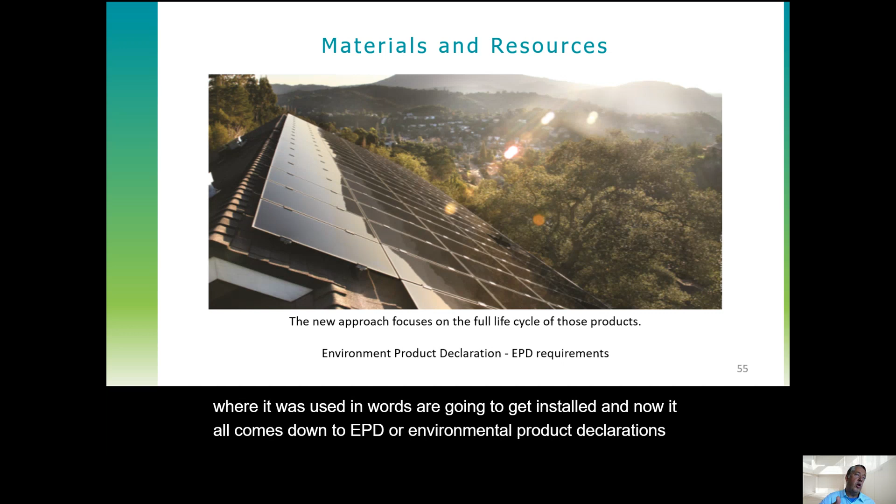For materials and resources, there used to be a really convoluted calculation you had to do on how far the glass was made from where it was used and where it's going to get installed. Now it all comes down to EPD, or environmental product declarations. So you have glass in your building, you get an EPD for it, you get enough EPDs, you can get LEED credits. The last one is indoor environmental quality — how much daylight, how comfortable it is, occupant wellness — all those sort of things are really the ways you can drive credits.

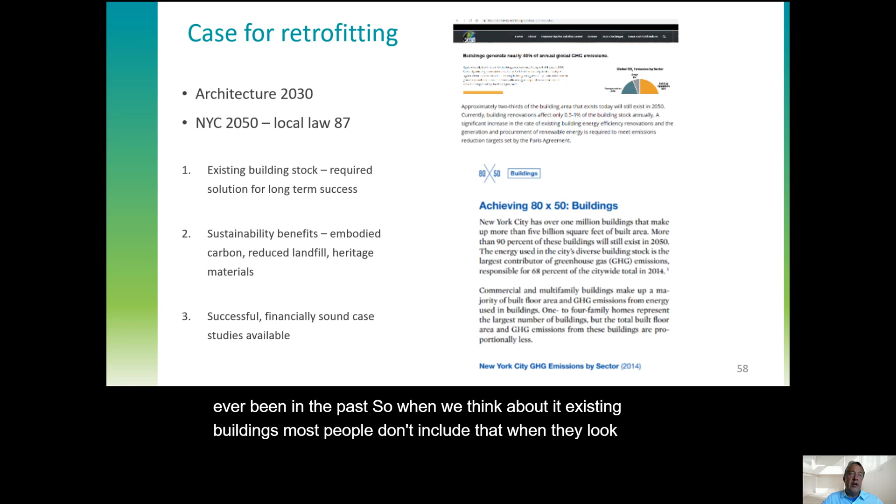One of the last things I want to talk about is retrofitting. We're seeing this really large case for retrofitting being a much more interesting and valuable proposition than it's ever been in the past. When we think about existing buildings, most people don't include that when they look at construction or energy codes. Most times what we're looking at is energy codes on new windows, or if you do replace the windows, they have to be to a certain level. But there's really been no emphasis on what do you do about all the existing buildings.

But there's things in the US looking at this, like Architecture 2030. And in New York City, there's two laws, Local Law 87 and Local Law 97. What these are now starting to do is say any building bigger than either 25 or 50,000 square feet has to start doing energy reporting every year. And then by the year 2030, you have to reduce your energy usage by 40%.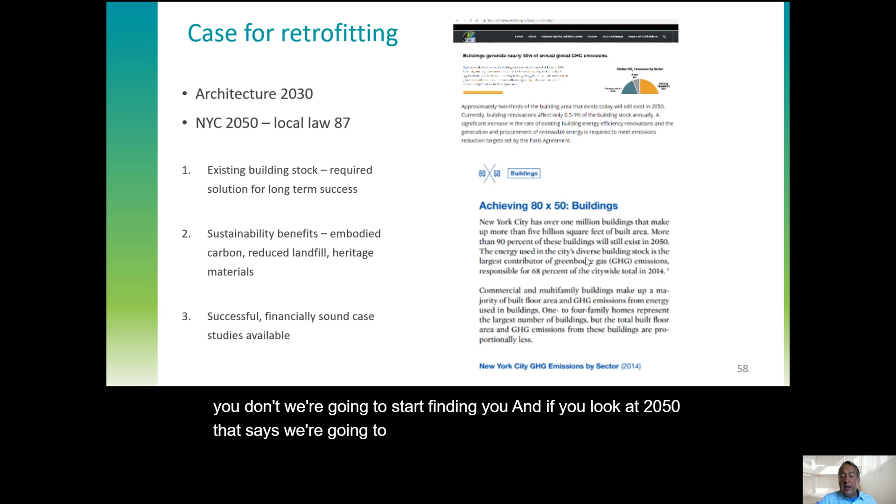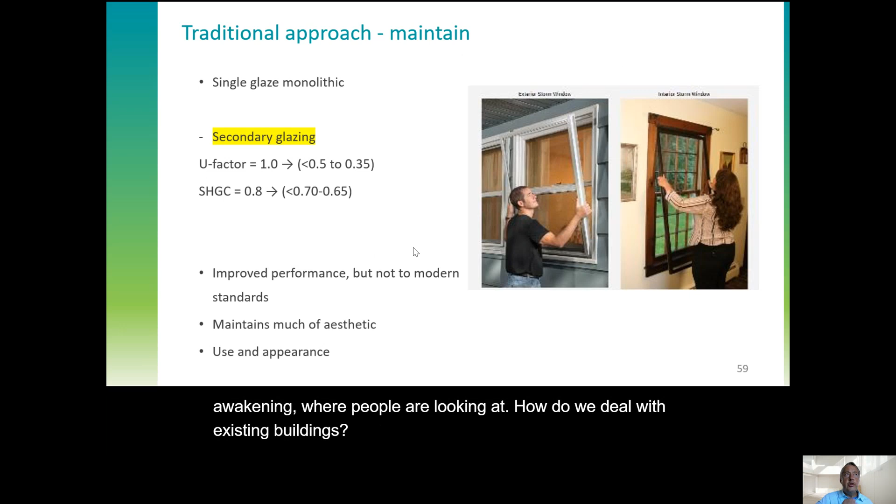And if you don't comply, we're going to start fining you. If you look at 2050, that says we're going to reduce emissions by 80%. And if you look in more depth, in 2050, 90% of the buildings that will be in New York City are already built today. So if we're going to solve these problems, we have to start addressing existing buildings and get them much more energy efficient than they are. This realization is starting to cause an awakening where people are looking at how to deal with existing buildings.

There are two tacks people typically take with an existing building. One is wanting to keep the windows, sometimes because you have to—it's a historically registered building—or you like the way they look, but you want to improve energy efficiency. So you do a secondary glazing, an interior or exterior storm. That helps efficiency, but it's not great, and there are trade-offs in terms of aesthetics.

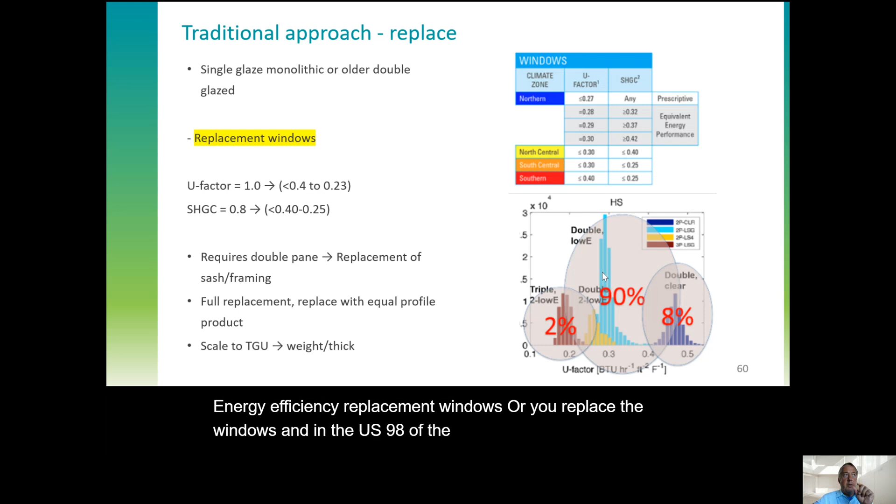You have to take the storms off and clean them, and they take up some space in your window framing. So that does a pretty nice job, but most times it doesn't get you all the way to the energy efficiency of replacement windows. Or you replace the windows entirely. In the US, 98% of windows that get replaced use a double glazed IG unit, and most times that has a low-E coating on it.

But when you do that, you rip out the original windows, so you lose all that heritage material and a lot of the aesthetics of what that window looked like. You also typically have to put in something wider, thicker, and heavier than what you had in place. So sometimes you have to beef up your framing to hold the extra weight on the skin, and sometimes you actually lose some square footage in the apartments.

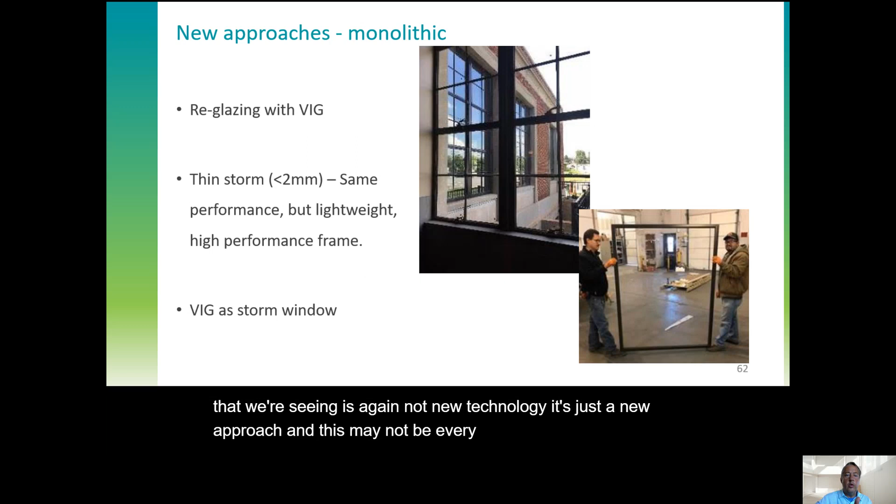So that's typically what's been done, and what we're seeing now are different approaches—not new technology, just a new approach. This may not fit every product or case study, but it works in some cases. We're seeing people reglaze existing buildings using vacuum insulated glazing. You take out the 1/4-inch plate glass and put in a 1/4-inch VIG unit in that same space—huge energy efficiency improvements, without really changing the aesthetics of the original building.

We're also seeing people start to address not the performance side, but the weight side. What you see on the bottom right is a storm window, and instead of a traditional 1/4-inch or 6 mm piece of glass, this is 1.3 mm with a safety film applied. This goes into large fixed building windows where people are pretty far from them. The reason they're doing this isn't to get better performance than standard storms—it's to get that same performance without adding all the weight.

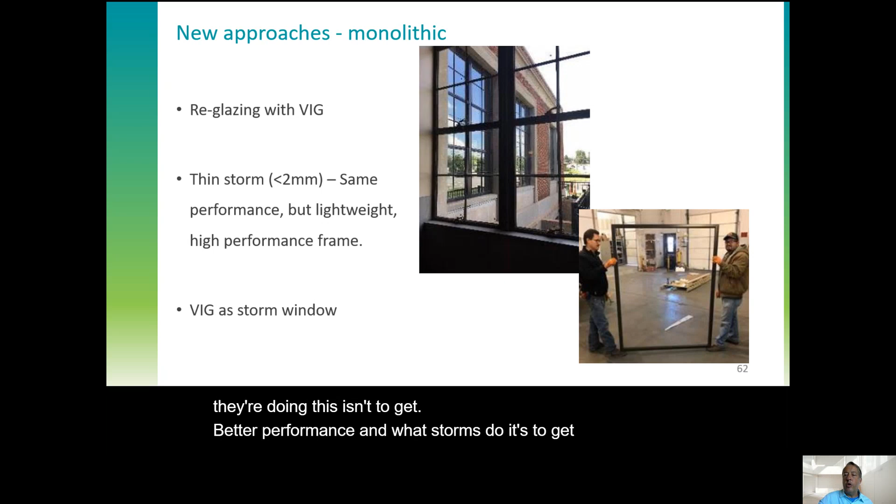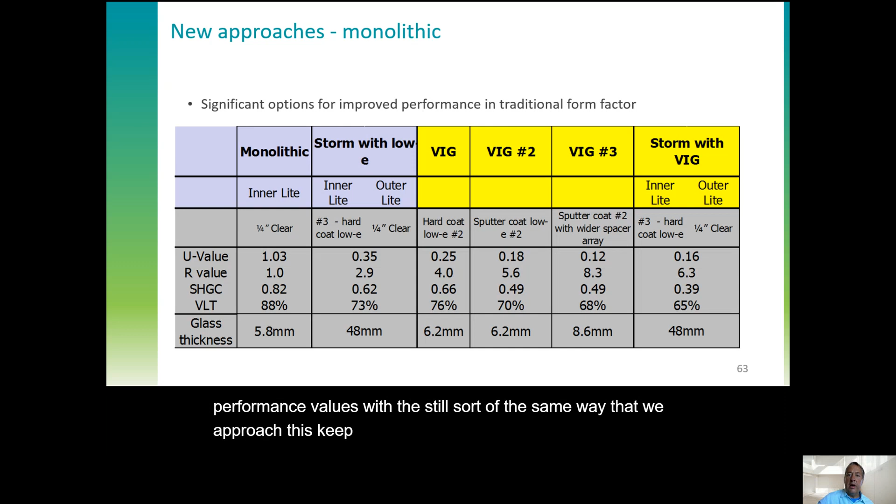And lastly, we see people using VIG as a storm window. Essentially what you get then is a triple glazed performance in a retrofit solution—you have the original window plus two pieces of glass in the VIG. So you get really nice performance values while still using that same keep-and-retrofit approach with secondary glazing.

We're also seeing people address new ways to think about double glazing—this could be an old failing 1970s double glazed curtain wall, or new construction with double glazing. We're seeing people adopt what's called a thin triple. So imagine a 1-inch IGU: instead of going to a 1.5-inch triple glaze, this takes a piece of 1 millimeter, really thin glass, puts it in the middle, with a Krypton fill on both sides. Now you get triple glaze performance in a double glaze form factor.

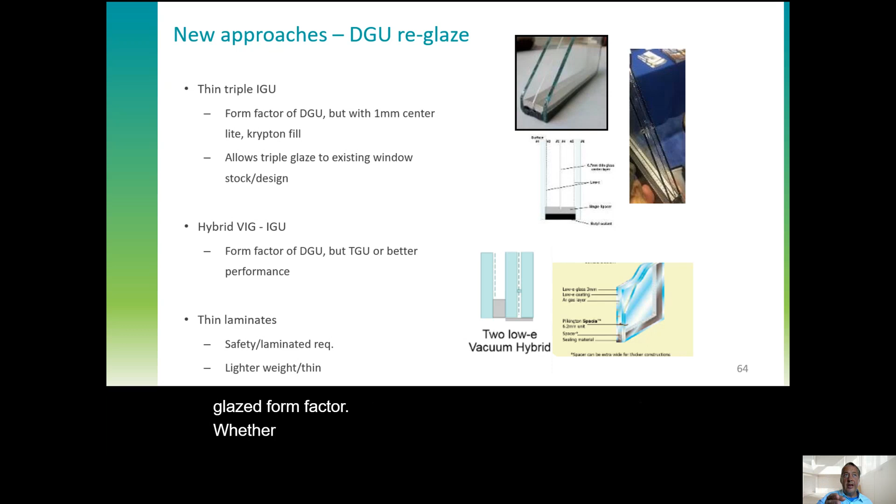So whether you're retrofitting an existing double glazed curtain wall, or putting this into new construction that's used to handling a 1-inch IGU, you get that performance without sacrificing your form factor. You can also do this with what's called a hybrid VIG IGU—so with that same double glaze, you use one of the panes of glass as a VIG.

Lastly, addressing the weight side versus the performance side, using thin glass as your laminates instead of 1/4 inch over 1/4 inch or 3 mil over 3 mil, if you can use a thin piece of glass for that laminate, sometimes you can get really similar performance values without adding all the weight to the design, and really nice performance levels.

So the last thing I'm going to talk about is a couple of case studies where some of these retrofit solutions happen. One of the biggest ones was a building in Milwaukee, an Eero Saarinen design building—he's a famous architect. This was designed in the 1950s, 1955 construction.

The architects were hired to do a curtain wall replacement, re-curtain walling the entire thing. They said, well, we can do that, but it changes Saarinen's design so much that let's see if we can actually maintain this. When they looked at it, the steel was in really good shape, so they could have saved it and just cleaned up some of the corrosion.

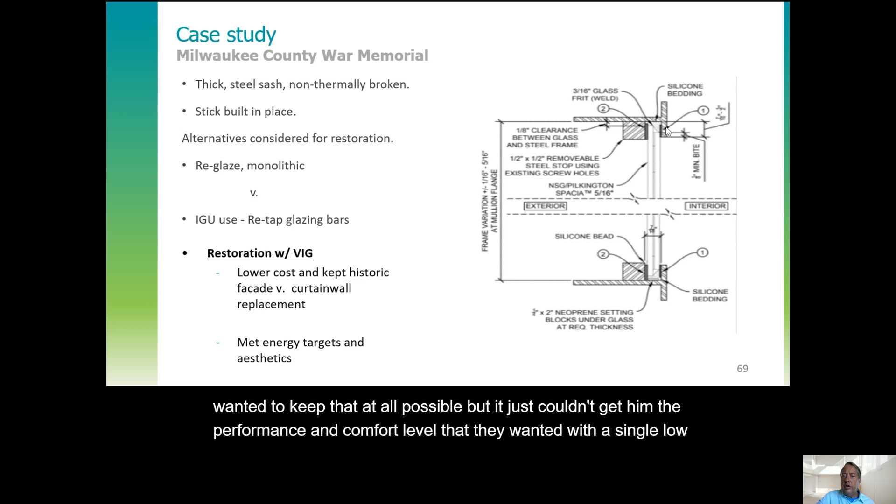They could have put in a 1-inch IGU and moved the glazing bars back, which really wouldn't have changed the aesthetics of the building—it would have looked okay and wouldn't have impacted sight lines. But it would have meant re-tapping 14,000 glazing bars, adding tons of new holes, refilling the old holes, and adding about 2 months to the glazing schedule. The project cost overruns made it to the point where it didn't make any sense.

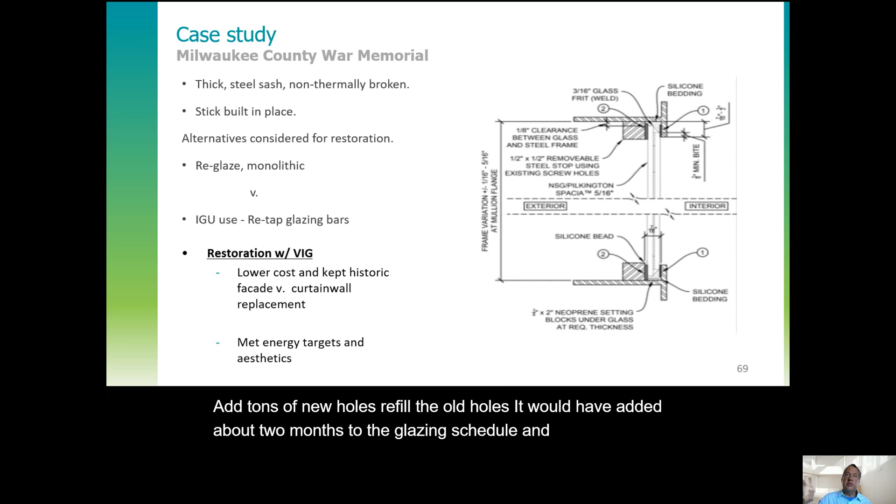So they ended up reglazing with VIG. They used the same glazing bars, the same holes, the same screws, and it was actually the lowest cost alternative product. It worked well and kept Saarinen's design. This won a few federal and state AIA awards. Again, it may not be the solution for every project, but there are going to be projects where this might be the best fit.

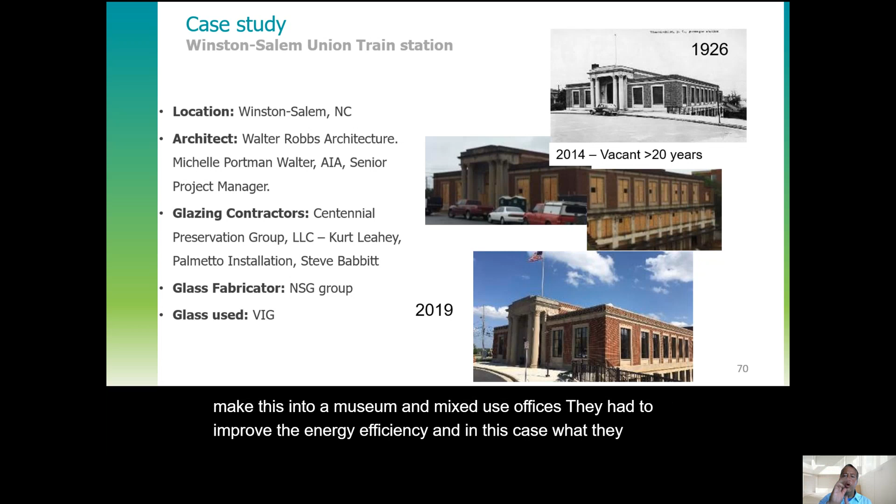A similar story: this is in Winston-Salem, the Union train station, built in 1926. They're going to make this into a museum and mixed-use offices. They had to improve the energy efficiency, and in this case what they were going to do is add exterior storms to get the energy efficiency up. But they had these beautiful old steel casement windows with bronze hardware—gorgeous.

But what happens with exterior storms is it changes the sight lines enough that it messes with your views. It covers up all that beautiful bronze hardware, adds a couple inches, adds maintenance, and doesn't really get you to the energy efficiency that you want.

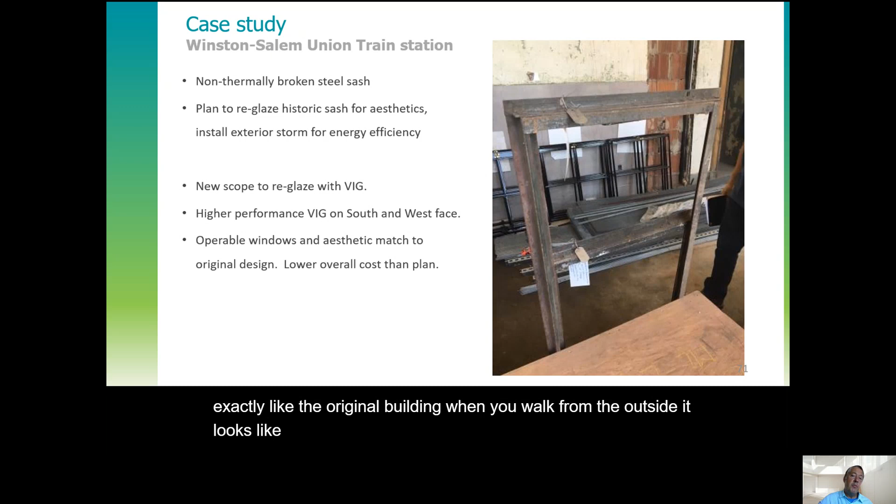So by reglazing with VIG, they were able to keep the aesthetics of the original building, and it ended up being a beautiful project. It looked exactly like the original building—when you walk up from the outside, it looks like plate glass. But it got them the performance they wanted without the other design trade-offs.